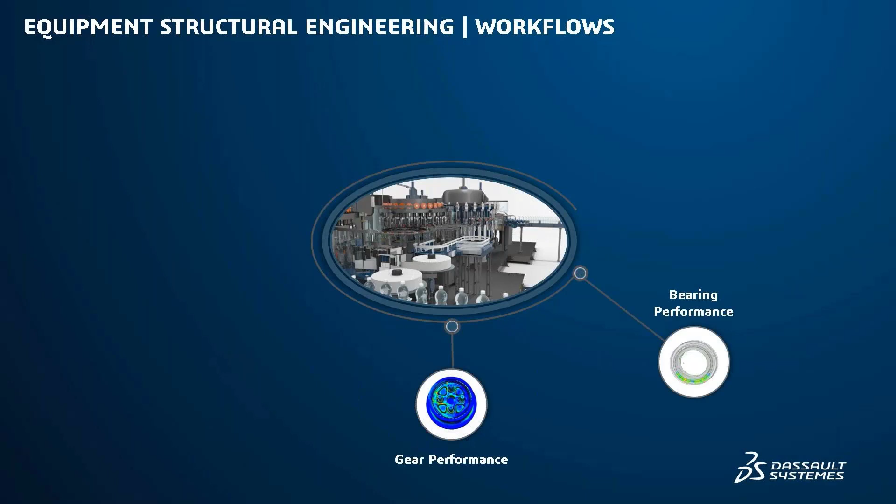Manufacturing products and the massive urbanization of the planet - industrial equipment is at the core of our global transformation. To meet this demand, both products and manufacturing processes need robustness to minimize downtime and associated costs. Increased reliability leads to reduction in maintenance costs and significant savings for industrial equipment companies. Leveraging the equipment structural engineering industry process, industrial engineers design extended life while successfully meeting performance, operational, and manufacturing requirements. The equipment structural engineering industry process experience provides a set of solutions specifically conceived to maximize the life and performance of manufactured industrial equipment. Our solutions are powered by the 3DEXPERIENCE platform, a collaborative space where innovation is fostered through integrated processes from requirements to modeling to simulation.

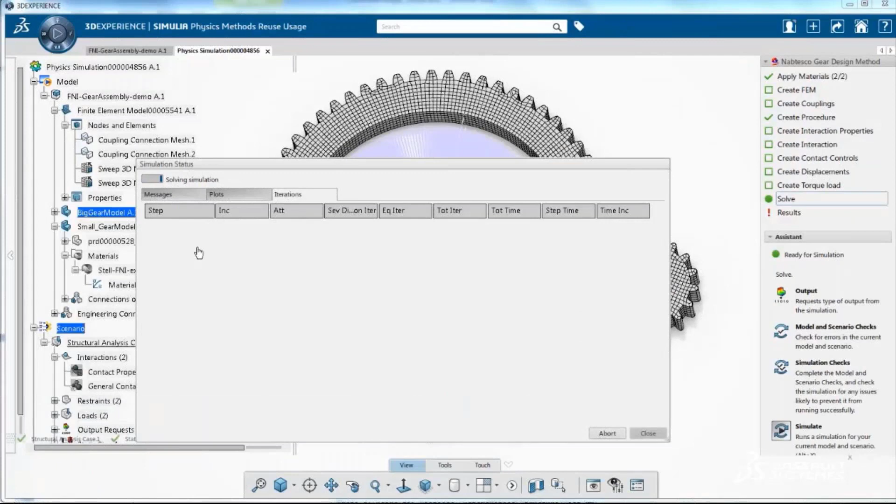Gears are fundamental components for all industries. Failure will often result in catastrophic failure of the entire system. Our efficient and accurate simulation-driven design process on the 3DEXPERIENCE platform helps ensure proper performance and predicts durability to minimize risk of failure and associated maintenance and downtime costs. Not only are individual components critical, but how they interface with each other plays a key role in their ability to perform throughout their lifespan. Our solutions allow you to efficiently assemble digital components and quickly determine the best design to meet durability and performance requirements.

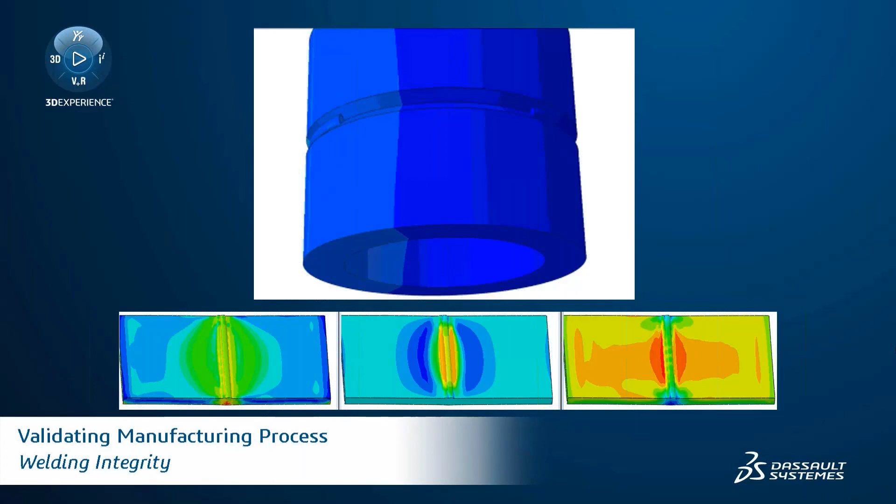Processes themselves can introduce reliability issues. Welds are critical for the assembly of components and thus potential points of failure. With our structural simulation solutions, you can ensure that welding processes do not introduce undesired residual stresses that can cause failure in operation. Finally, complex manufacturing processes such as induction hardening can introduce defects in a manufactured product, such as distortions or cracks. These defects can be predicted and eliminated with a digital induction hardening process using our best-in-class technologies, ensuring reliability of products. With the equipment structural engineering industry process, you can ensure that your manufactured products will perform in demanding environments and stand the test of time.

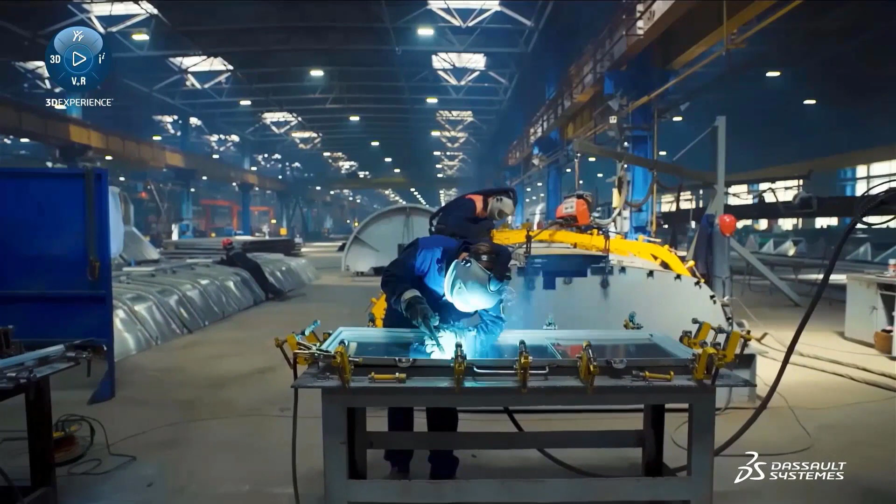All right, so I hope this gives a brief idea about what this is going to be about.

This technology is called 3DEXPERIENCE Works, and the solutions it brings together is what we're going to see as the 3DEXPERIENCE platform simulation. The 3DEXPERIENCE platform is nothing but a platform where all the brands from Dassault Systemes come together and share a collaborative dream to give better solutions to customers. You can have different areas that you work on, all targeted within the same platform using the different brands from Dassault Systemes altogether. There are different brands: SOLIDWORKS, CATIA, SIMULIA, and others. We are going to work in collaboration with the Dassault Systemes SOLIDWORKS and SIMULIA brands altogether on the 3DEXPERIENCE platform journey that we are about to see.

The 3DEXPERIENCE platform simulation is nothing but your integrated simulation for your design. It is design-centric and very comprehensive, with advanced simulation capabilities. It is a multi-physics simulation - we can couple different physics domains together - and it is an on-cloud, scalable solution as per your industrial need. And of course, all the stakeholders can collaborate between themselves with the help of this 3D experience platform simulation solutions. So that's what 3D experience works carries to you in terms of this.

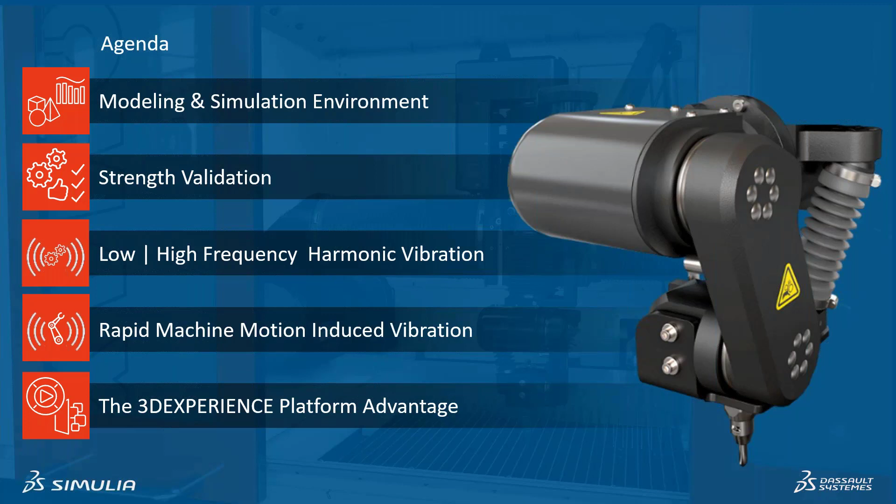Of course, this will all be told together on the way, the advantages of the platform here. So let's focus on the first task: modeling and simulation environment.

In here, of course, we are designing in SolidWorks, and our data will be designed in SolidWorks. In order to make use of this cloud solution of the 3D experience platform, we have to save our data on the cloud. So of course, we create a CAD, and with just a right click, we save the data on the cloud. That's how easy it is.

So there's no import and export of CAD data. We're just saving a backup copy on the cloud, just like we do with Google Photos. We get these photos, we have one copy here on the desktop, or on the mobile phones, and we get another copy on the cloud, Google Cloud, just like that.

So next, let's see how we can have a quick and easy connection between SolidWorks and Simulia through the SolidWorks connector. There's something called a connector in between, and we can connect SolidWorks to the 3D experience platform. Through this connector, we are going to push our data to the 3D experience platform. That's how easy it is.

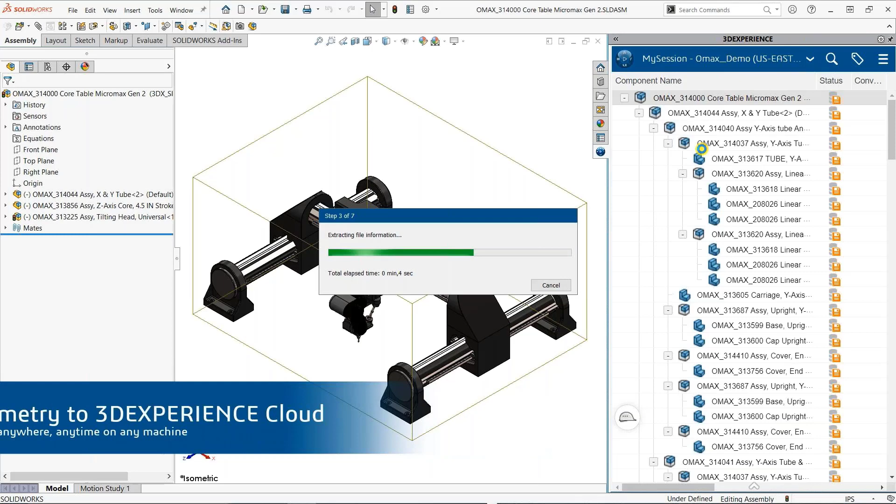Once we save it, it's going to be saved in the PLM environment, which is powered by the ENOVIA solutions from Dassault Systemes, and everything will be saved on the cloud. A copy will be used afterwards for simulation purposes there.

That's how we can easily pull the data here. We can see the conversion status on the right hand side, and once the assembly got converted, we are free to use this for launching the Simulia app.

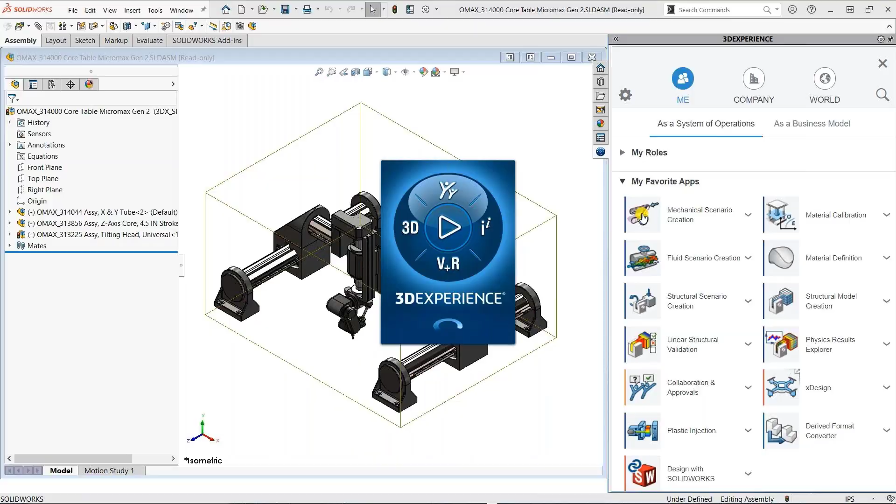Of course, for launching the Simulia app, you don't have to go very far. You can directly launch it from the same 3D experience add-in here. And on the way, we can set up the simulation studies, set up the analysis title, types, etc., directly from this environment here.

So that's how your data is connected to SolidWorks and the 3D experience platform side. I can go ahead and rename this simulation title and choose which type of analysis you want to select. And with the help of OK, we can quickly go to the further studies to set up here.

So in here, you can see we are actually not moving further away from the design. Everything is connected. Once you make a change inside the SolidWorks design, this is obviously connected to the 3D experience platform. This change will be reflected there with the help of this update button. The change will automatically be updated on the 3D experience platform directly from SolidWorks through the connector. So your data will always be in sync, and every change that you make will be reflected there. And if you want to store the revision, yes, revisions can also be stored there.

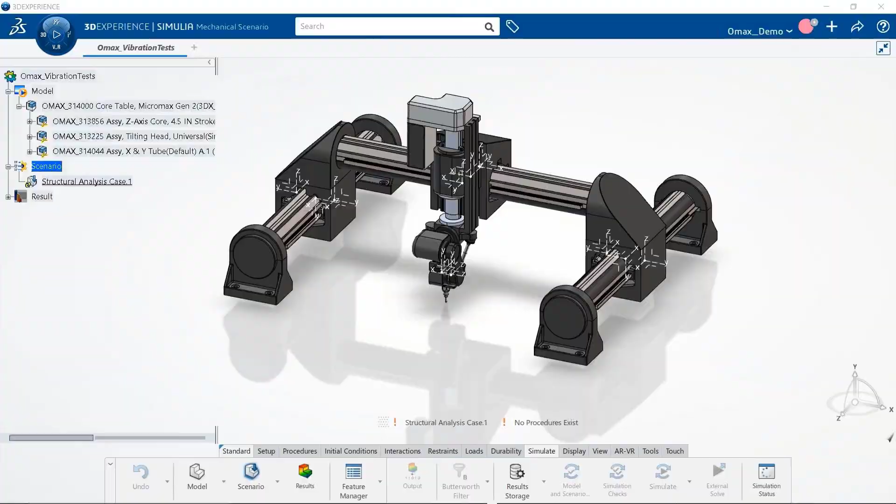So next, we can see how we can define the FEM, how we can define the materials, whether my materials will be carried here or not, and how we can go ahead and define, let's say, the finite element model in order to make the analysis here.

Let's see how we can do automated finite element representation, like we are used to doing in SolidWorks simulation. Of course, this technology can be elaborated in the 3DEXPERIENCE platform simulation as well. But the thing is, here we have very advanced meshing capability as well in the 3DEXPERIENCE platform.

We can manage the part mesh in large assemblies, configure the mesh using mesh procedures. That is to say, I can give a rule, and rule-based meshing can be done for all the parts all at once. So that's how powerful it is to do it.

So let's have a look how we can do this, one by one. Once I have brought in my design here, I can switch to something called the model assembly design app, where I'm going to set up something called the FEM model.

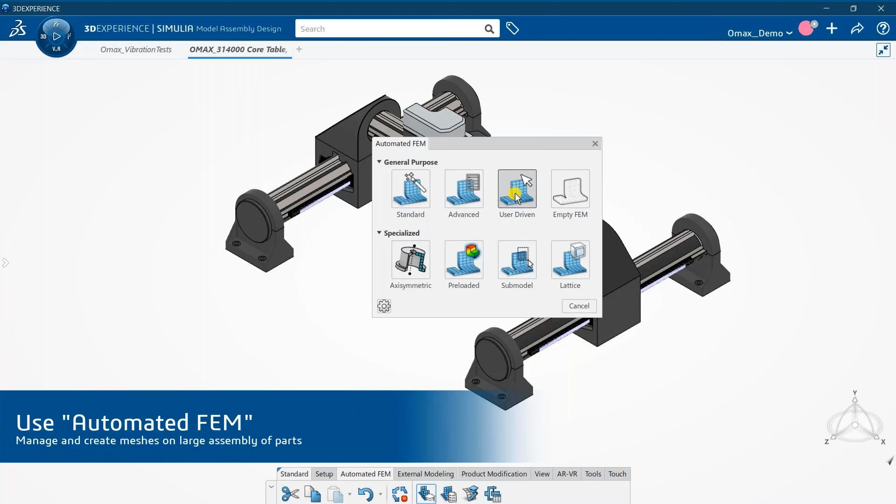The FEM model is nothing but your finite element representation for your entire CAD model. And based on the finite element method, we are going to solve this for various problems like structural analysis, vibration analysis, and so on.

I can make use of different ideas here. For example, if I want to apply meshing, I can go ahead and do the conventional tetrahedral mesh that we're used to, and I can make changes to any mesh here.

On the right hand side, I can ignore some parts that I do not want to mesh, and I can go ahead and assign different kinds of mesh to different kinds of parts.

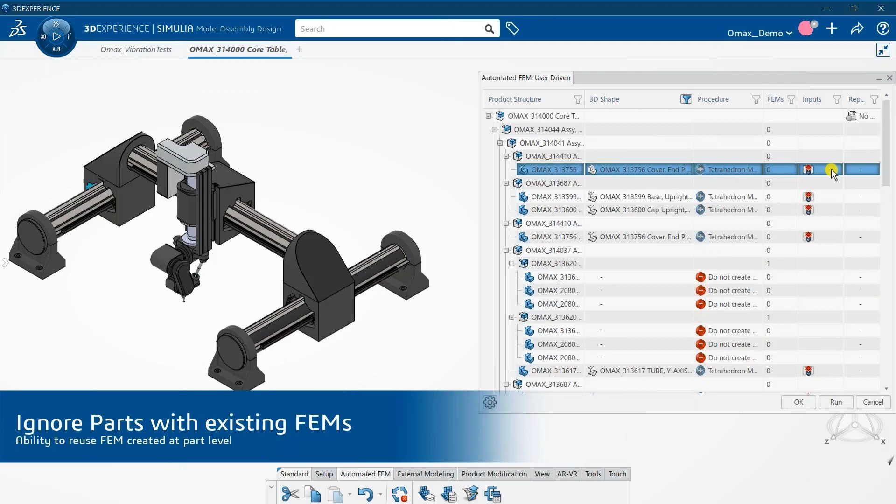This technology is powered by Abaqus in the background, so the meshing technologies from Abaqus are carried over here, and these can be leveraged in terms of meshing as well as solver capabilities.

Once I'm done with the meshing, I can apply the mesh for the remaining parts. Here you can see remaining parts — I've just done it for one sub-assembly. I can go ahead and do it for the other sub-assemblies.

If you want to do some other meshing, like rule-based mesh, you can apply the procedures for the mesh. Currently I'm just ignoring the parts which are not going to be meshed and will be ignored in the analysis — those things I'm taking care of here.

Once everything is set here, I can hit OK, and in the background the meshing will be happening on the simulation.

Yes, we can define the materials. The materials can be defined in an easy fashion — just like we go and apply material in SOLIDWORKS, those materials will be carried over here.

Or with the help of the material definition app, we can select and apply materials to the parts, just as we used to do before.

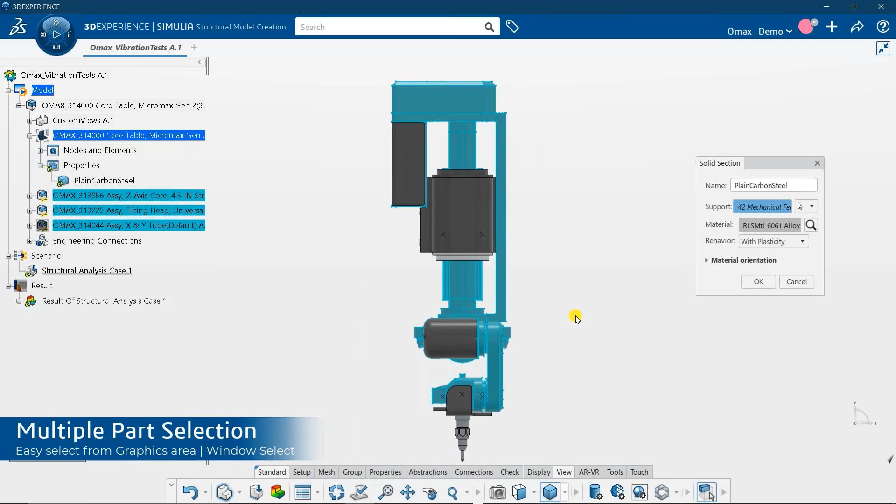We can select all the assembly at once, or we can ignore some of the parts here if you don't want to include them.

With the help of these material palettes and search filters, I can choose from the extensive database which material you want to apply.

For example, if I want to apply plain carbon steel, I can choose which simulation properties are taken care of, whether you want to solve it with plasticity or without a plasticity model — these things can be handled in the background with the model definition app.

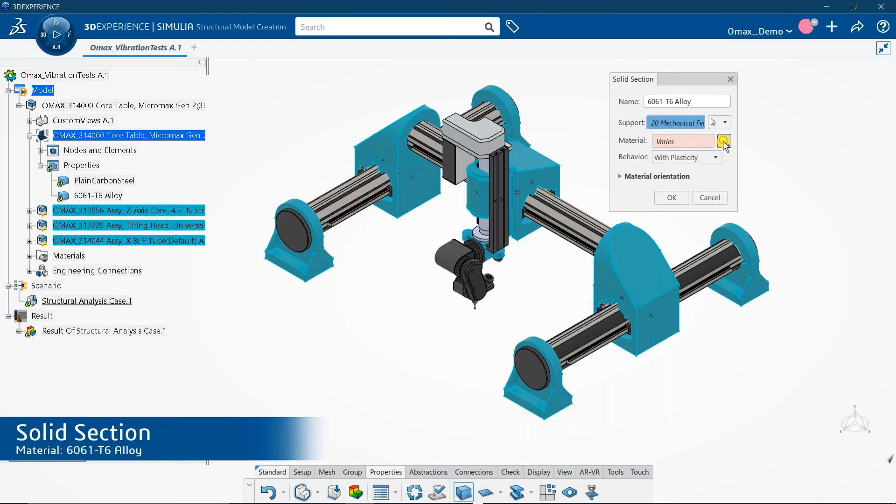This procedure is repeated for the different parts, with section definitions repeated for the remaining parts you want to include in the analysis. Every part should have a section and material definition assigned to it in order to solve this in the finite element model.

It's not only limited to metals — plastic materials can also be taken care of here. As you can see, copolymer materials will be assigned to these parts, I think these are the caps. In the same way, we can assign the rest of the parts and materials.

With this material definition done, let's move on to the next step in the analysis. Every step is guided by the assistant panel, which will walk you through all the procedures you want to follow. Let's say I want to define assembly interactions such as ties, couplings, and connectors, to define how the components are coming together. This is where we can make use of this panel to set assembly interactions.

You can set assembly interaction into it. The tie will bond all the parts together so they behave as a welded part or single part. Coupling will track the key results at the tooltip, and since this is a water jet machine, I want to see how much the self weight will affect the accuracy here, so I want to track the results at the tooltip - it works like a tracker for my results data. Connectors will control the relative motion between the parts, so that's how connectors or couplings take care of this.

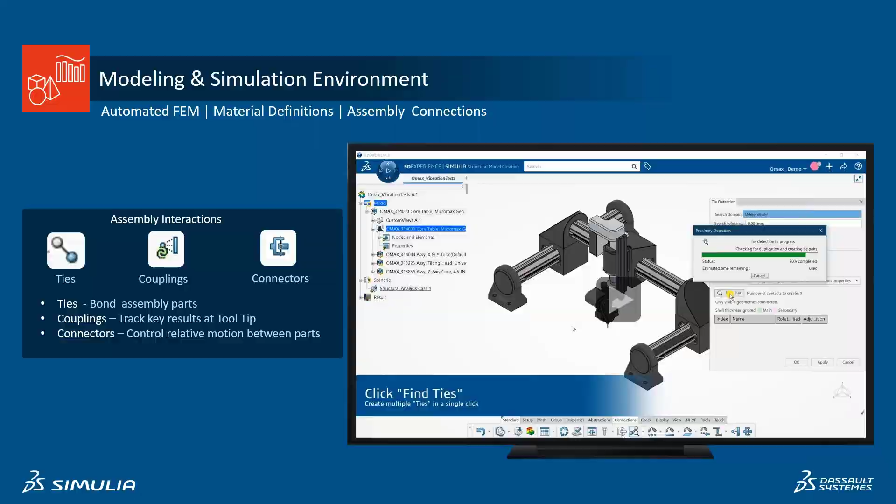In order to assign that, I want to go to the connections, and here we have something called tie connection. With the help of automatic tie detection, we can select the whole model, and it will automatically detect which components are touching and which will come into the connections. It will pinpoint which components are touching and suggest which can be assigned with tie connections, and we can decide where we want to assign the tie connection.

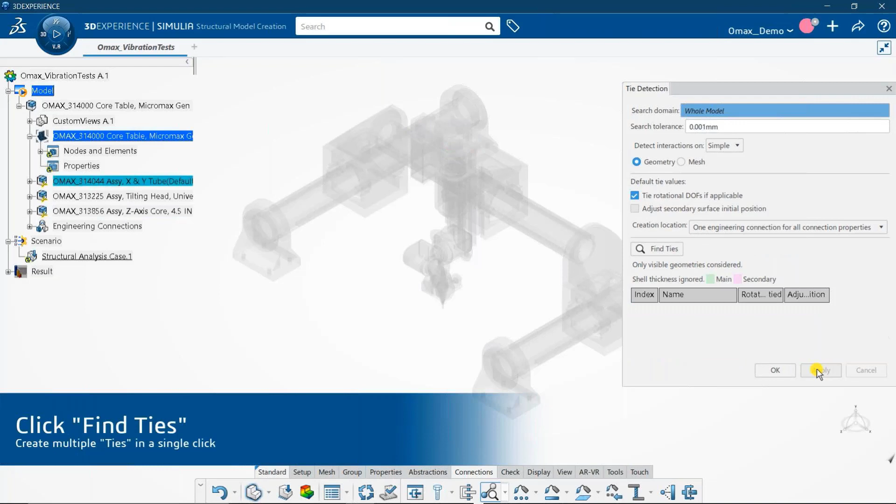So we can select the portions you can see. Once we hit OK, everything will be tied together just like a bonded contact in SOLIDWORKS. Once we assign this, we can go here and represent the engineering connections and rename this with the tie connections we want to see.

Likewise, let's say if you want to create a link connector, link connectors can be selected here. Links between two supports or parts can be created, and along with that we can assign the translation and rotation definitions for this link connection. Here you can see this is sort of a ball joint - this is a link between two ball joints, and this is how this small degree of freedom is taken care of.

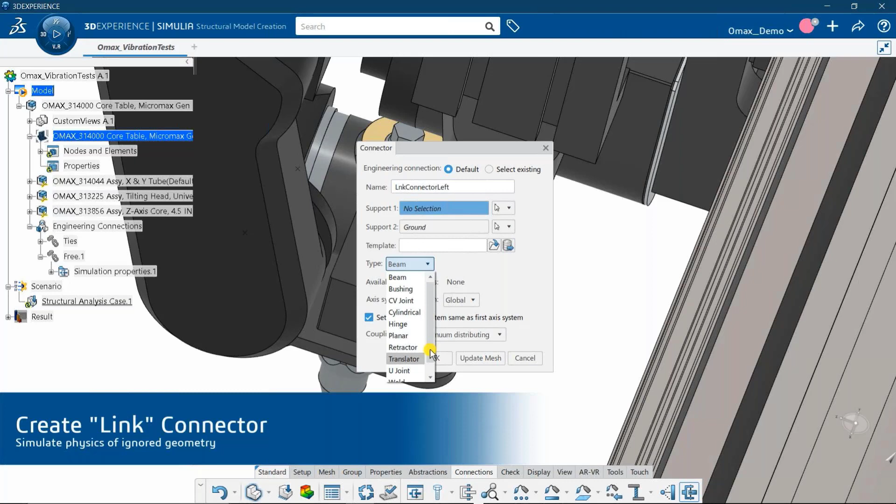Once we select that with the help of this link connector, you do not have to take this part into account, since we have ignored this in the meshing. We just want to save on mesh calculations - we do not want to include that part, but we want to take the effect of that part into account. So that's where the connection is being taken care of.

Between parts, this is taken care of with the help of rigid body elements, and with this coupling we are depicting the effect of that rod into the simulation without taking the CAD model. Finally, with the help of coupling connections, we can track the tooltip and assign and track the results data all across that tooltip.

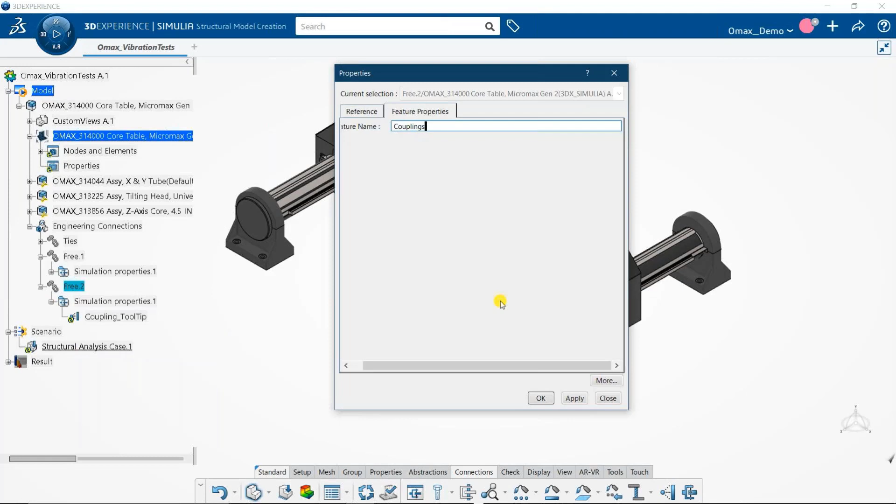You can see that towards the left hand side, everything we do has been recorded onto the feature manager tree, along with the definition, the CAD, and the simulation - all of the stuff gets recorded on the left hand side. At any point in time, if you want to change things, you just have to go to the left hand side and edit those things as you feel.

So defining and editing is a single way task here. That's how we can have seamless CAD and CAE associativity, and with the help of very quick and few steps, we can define the simulation setup along the way.

So now we have defined the modeling and simulation environment. Now let's have a look at how we can do the strength validation here. For the strength validation, we just have to go for physics scenarios, and we have to create one scenario here. Of course, we can set up a scenario likewise. So let's consider a scenario first here.

My scenario here is I have to analyze the structural weight, and of course I want to see the tooltip reaction from the water jet, how this thing is affecting my structure here. Since this is a water jet machine, from the nozzle tip to the workpiece there will be a water connection, and if I assume the water is an incompressible fluid with no way to escape, there will be a reaction to it, giving a reverse back reaction to the tooltip, and every structure gets affected from that reaction.

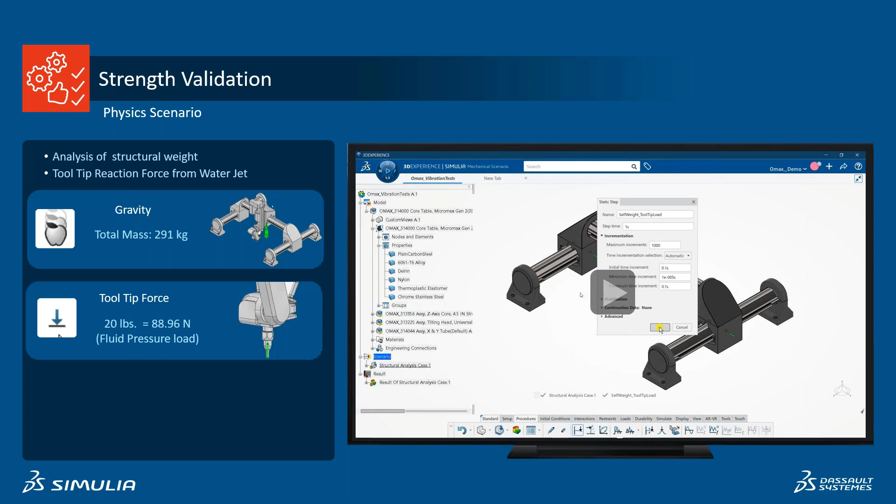So I just want to analyze this scenario from here. The loads I considered are nothing but gravity, the tooltip force which is the backward force, how this tooltip applies a fluid pressure load onto this, and finally the clamp. So this thing will be fixed at the clamp location whenever we are machining here.

Of course, this head will be moving during the machining, but let's say I consider a static scenario right now, just to test this assembly from the static standpoint. In that case I just want to assume these things are locked together and everything is bonded together, and then the force will be coming. We can see it as the starting moment of this water jet machine.

In order to do the scenarios, I can go to the mechanical scenario creation app. I can go here and create the static step. The static step is a non-linear step, and I can define a time increment, and that's how the simulation becomes very accurate, since we are using non-linear analysis from the start.

So here I can go and select which areas that I want to clamp together. Clamp is nothing but the coupling - those four bolted portions there. I can assign the gravity to all the models, and this arrow will indicate that the gravity load is assigned, and finally we're going to assign the tooltip force at the tooltip here.

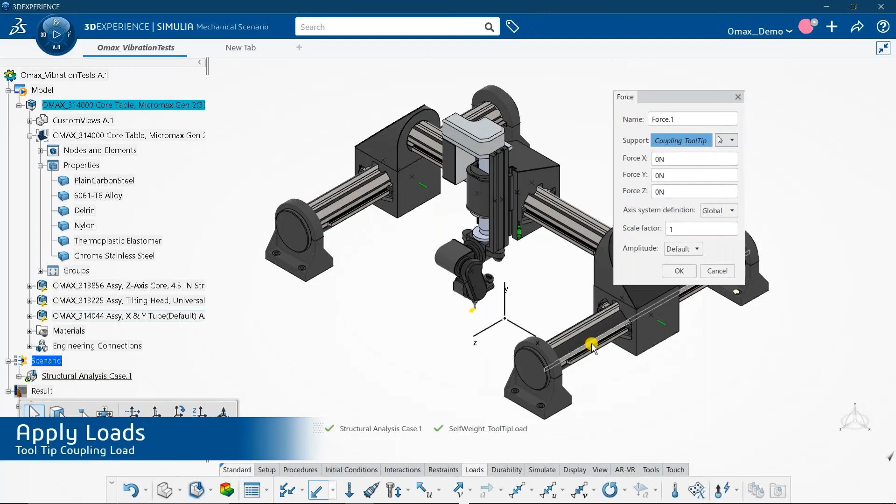So in here I can go and select the connections. Since we have assigned the coupling there, I can directly assign load to the coupling, and the coupling will transfer that load to the tooltip here. That's how this thing goes on.

Instead of selecting the part, all the geometrical nodes will be concentrated to the coupling, and then from this coupling this load will be transferred to all those geometrical nodes, and then the rest of the geometry follows. Of course I can apply the translation here in order to get this effect into account.

Let's say servo motor lock here. So in here I am assigning zero translation, that is there's no relative motion between the parts along the way, and that's how we are going to test it for the self weight and the gravity tooltip force.

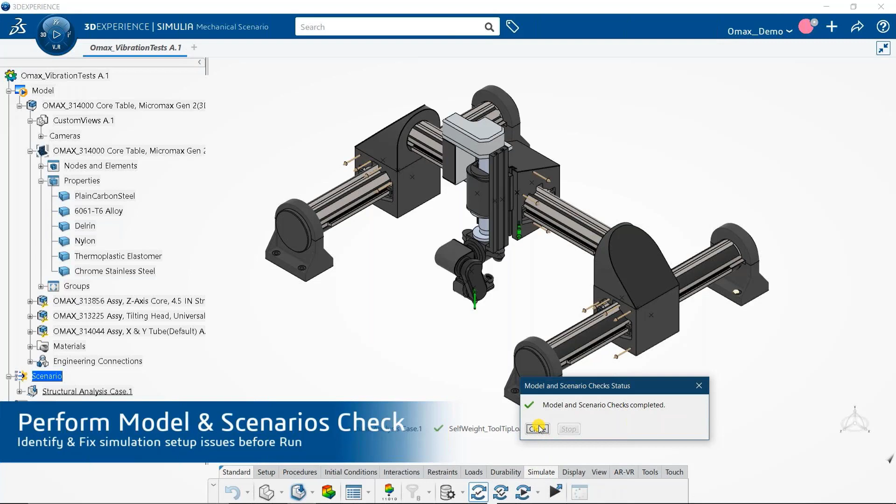Of course I can perform quick model and scenario checks. This is a very important step, because whatever I set up, I want to make sure that I set it up correctly or not. That's how the model and scenario check will help you out - it will tell you whether there's any problem with your setup, or if you need extra information. If you need extra information in the diagnostic viewer, we can go ahead and view what information needs to be fed to the solver. This is how the simulations are made error free from the setup standpoint.

All right, so everything is set up now. I just want to run the simulation. There are a few advanced options available here. In here you have something called running simulation on the cloud, and this is very fast, let me tell you. We can make use of the high performance computing resources along the way.

Of course, it will reduce your software and hardware cost along the way, and it will maintain your data consistency, streamline the processes, and improve the collaborations. Improve the collaboration, that is to say, if your colleague or your managers want to see what's going on during the design or in between the simulation, you can just share that simulation link there, and they can also view it on the cloud along the way.

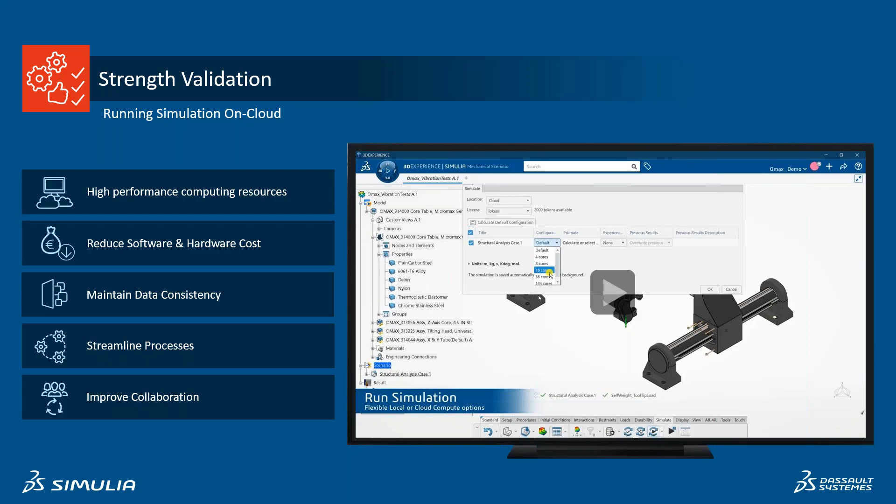So that's how everything will be taken care along the way. Once everything is set up, I can go here, hit the run simulation button, and of course we have options for cloud computing and local computing as well.

I can select how many cores I want to utilize. These local interactive options are your local computing options, which will utilize the local cores. Let's say if you're using a 6-core machine, it will utilize 6 cores, up to maybe 8 cores it can utilize locally.

But on the cloud, you can go up to 144 cores. Superb, isn't it? With the help of that, we can select how many cores we want to utilize, and that's how the solving time will be reduced. The number crunching will happen on the cloud, and you're free to do other work in the meanwhile.

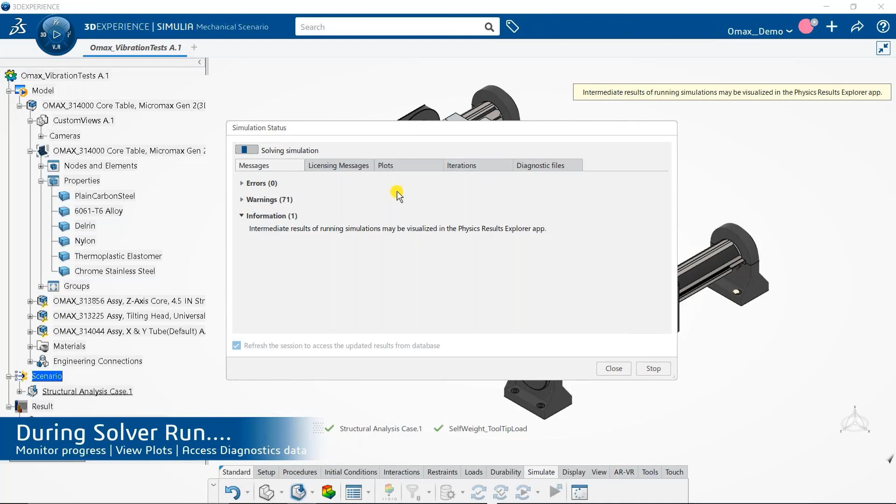So that's how productivity can also be increased during the simulation setup. And of course, we can monitor the progress. We can view the plot, access the diagnostic data, see what's going on in the solver background, what iterations are running, whether the plots are converging, and how the convergence criteria has been kept. All of this can be tracked with the simulation status window.

So likewise, you can see the iterations here. They will continue to do their job, doing the number crunching, and finally at the end, the simulation will extract the results and save the simulation on the cloud. Everything is done very smoothly and fast with the help of these cloud computing options.

And finally, we can hit the results button, and the results will be shown here. So let's have a look at what we can do in the physics results review.

My objective was to analyze the structural effect of structural self weight and the tooltip reaction from the water jet. We are going to evaluate this from the standpoint of von Mises criteria, because there are more ductile materials involved in this one.

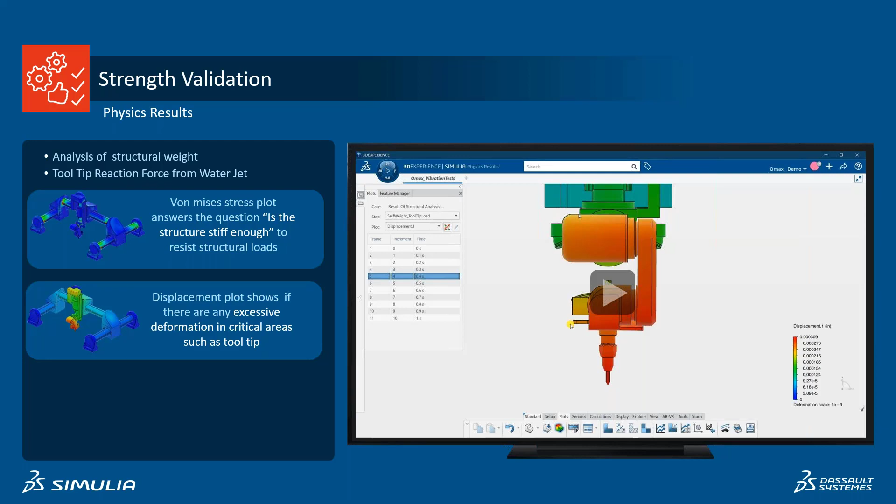Is the structure stiff enough to resist these structural loads? That's my primary objective. I just want to see how much displacement it will cause, because this displacement will ultimately affect my accuracy of cutting in place. That's how we can see it with the help of the displacement plot.

And of course, I can check the coupling responses, which shows the concentrated loads and displacement at the tooltips. Since this tooltip is a very essential part in the cutting process, I want to track the niche and detailed results around this one.

So this is how we can do this, by tracking the displacement at the tooltip.

Once we hit the results button, we can see these results in the fashion of animation, in the fashion of structural plots. We can track down the von Mises stresses, and track down the results that have been raised here, and you can see the displacement results along the way. It's very intuitive to do, just like we do in our regular SOLIDWORKS environment.

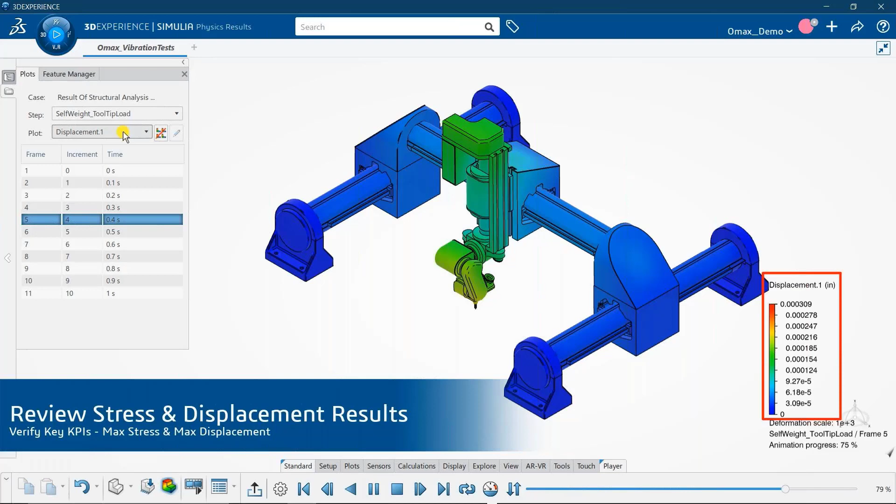The increments will be tracked for every step of the analysis, and the last step will give you the final results. With the help of animation, we can see how the response of the structure is going to be for that applied load condition.

Once we apply the load there, in the same fashion we can do it in the physical environment here. The probe displacement results will guide you about how we can probe the displacement along this tooltip. So here I'm selecting multiple points along this tooltip, and when I go to the XY plot, I can select which variable I want to track.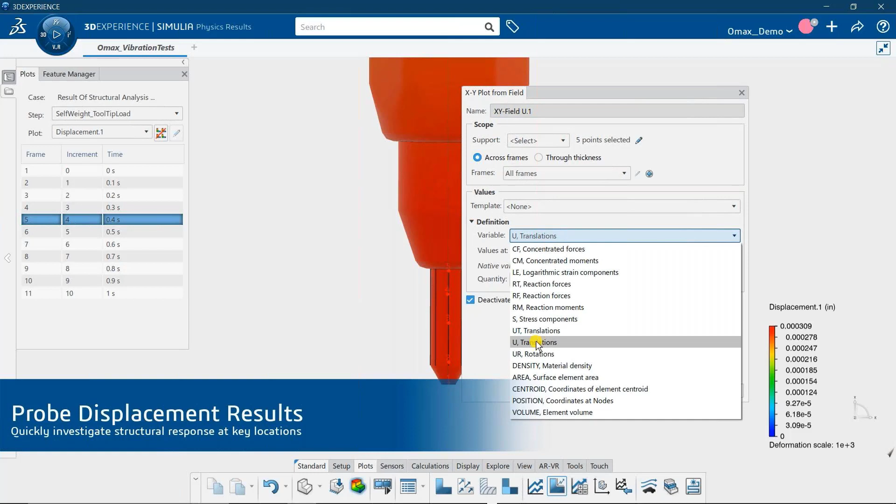Here I just want to track the translation, and I'm interested in magnitude only. Once I hit OK, it will tag the tooltip reaction or tooltip displacement results along the way. I can pin it down to the left hand side, and note how this tooltip is going to behave under this loading condition once the jet starts.

That's how we can track down and interact with the XY plot here. The detailed investigation of the results frame by frame can be done with the help of this XY plot, just as we do.

So, finally, let's move on.

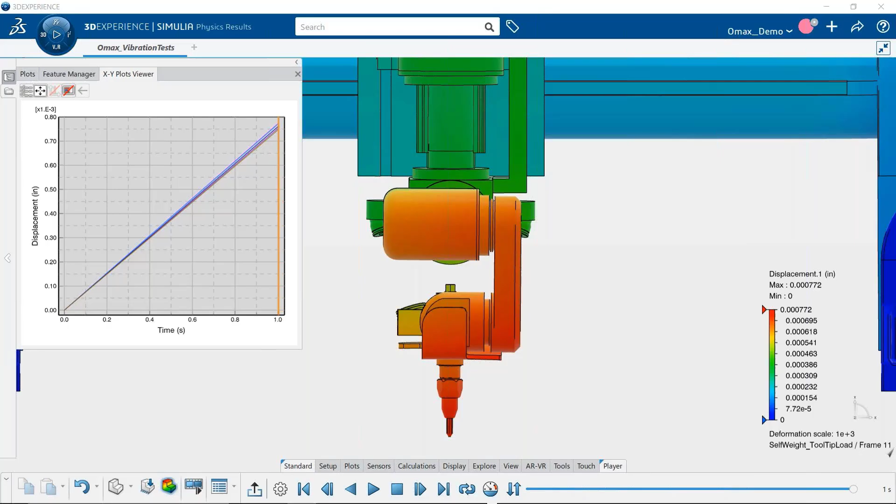This concludes the structural strength validation, which ensures the structure has stiff responses to the static load conditions. But of course, this is a machine, and there will not be ideal static conditions every time. There will be motion, and due to this motion, there will be some vibrations, and this vibration will also affect the frequency and the accuracy of the machine. So that's what we want to take care of.

So here we have a powerful low and high frequency harmonic vibration study that will tell you how we can track down the effect of vibration on the machine, how the accuracy is getting affected when we subject this machine to vibration. And of course, if we take appropriate measures using this data, we can reduce the effect of the vibration coming onto the machine. So that's how we can do it here.

So let's see how this thing will be processed. In order to do this, I'm just going to extract out the resonant frequencies first.

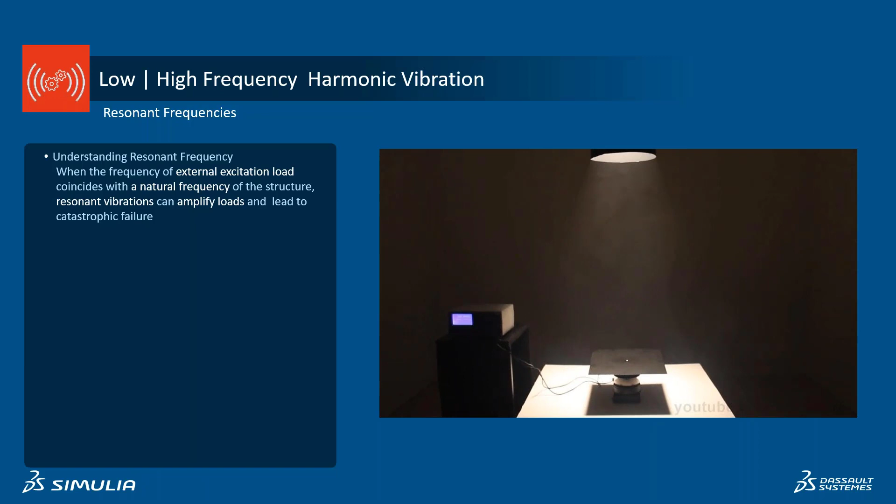To understand this resonant frequency: when the frequency of the excitation load coincides with the natural frequency of the structure, the structure resonates and amplifies the loads and the displacement, which leads to catastrophic failure.

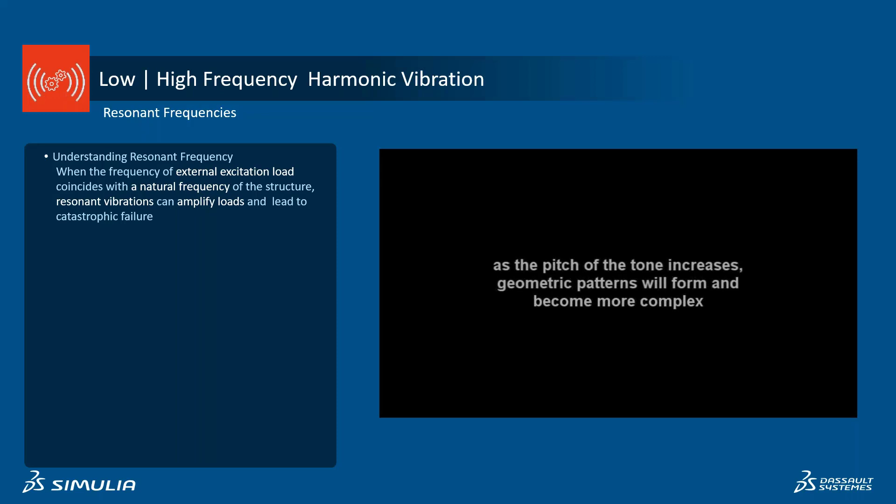You can see towards the right hand side, there's a video playing. It will show you, let's say this is a plate, where you can see there are tiny particles spread out, and you can see what happens at different frequencies, how these particles are reorienting themselves with the help of the vibrating frequencies.

So this is not magic, and it's not magnetically placed there. With the help of the frequency it's subjected to, you can see I'm changing the frequency values here towards the left bottom side. With the help of different frequency values, it is showing different shapes. Please remember, it is showing different shapes, and that's what we call mode shapes in frequency analysis.

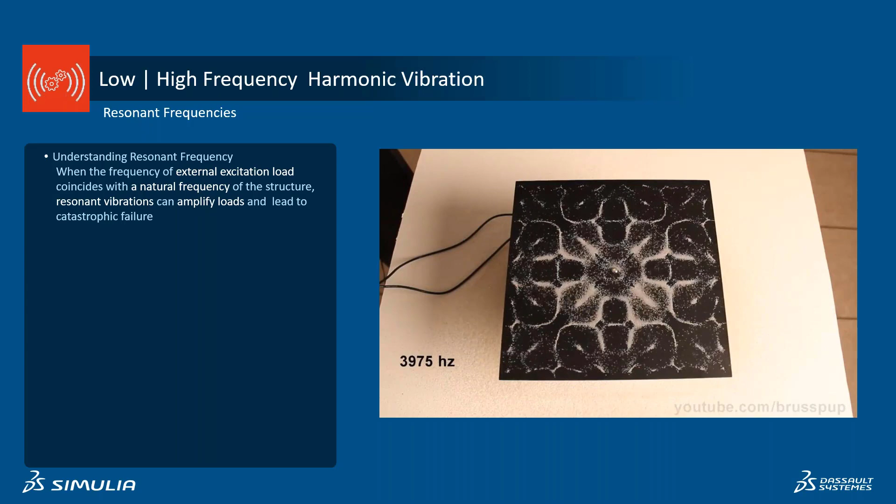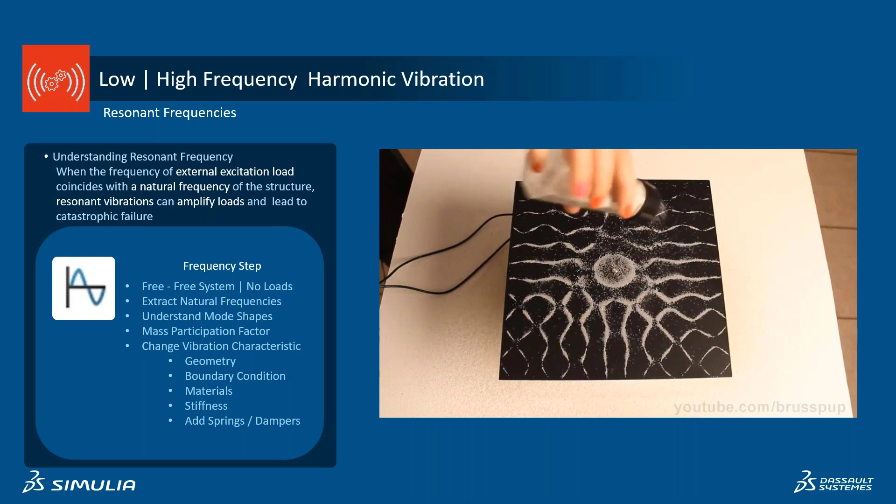So likewise, we can do further things here. We are going to define the frequency step. We are going to extract the frequency for the free system with no loads, extract its natural frequencies, understand the mode shapes and the mass participation factor, change the geometrical conditions like geometry, boundary conditions, material stiffness. We are adding dampers, and we're going to change the vibration characteristics along the way.

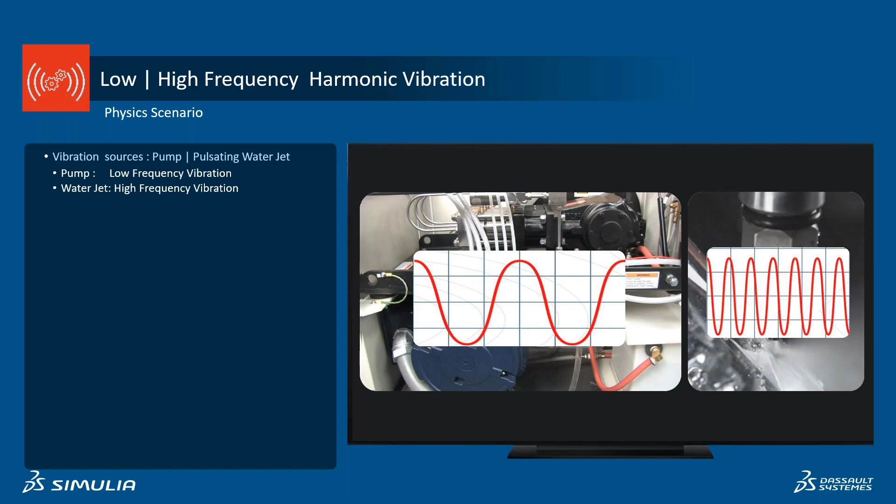All right, so let's correlate this application with our machine. In our machine, my main source of vibration is the pump and pulsating water jet. For the low frequency vibration, a pump is a low frequency vibration source. A water jet is a high frequency vibration source. You can see it rotating at 500 rpm to 1500 rpm. If I convert that to hertz, it's like 8.33 to 25 hertz around.

In order to create that, what we can do is create a new analysis case in the same analysis case we studied earlier. So you do not have to define a new study, it will all be tracked down here. You just have to define a new step. All the associated finite elements that we created earlier will be tracked in this study as well, so you do not have to go and change the finite element every time.

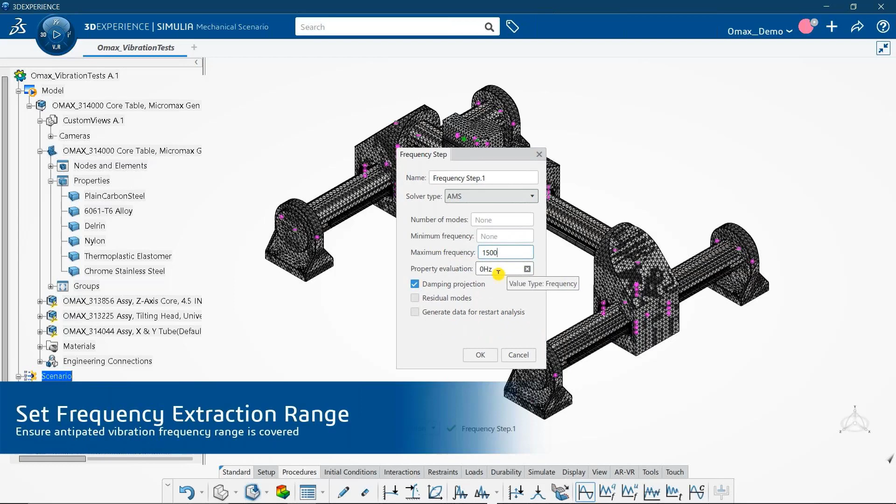So we can go ahead and define a frequency step. We can define which frequencies up to which we want to study. Initially, we are going to study for 1500 hertz. We are going to define two studies here, by the way. Here I just want to change some restraints for this one, and I'm going to select the clamp forces once again.

I'm going to assign the fixed displacement constraints for some translation here, for the servo motor lock. Just in the Z direction, it is going to be frozen - it's not going to move there. And the other servo motor is going to be locked in the X direction.

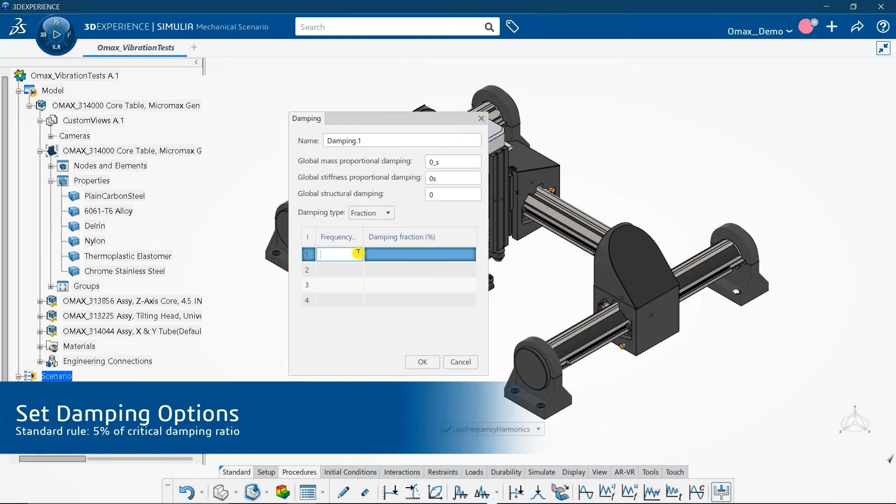So here I'm just going to create a harmonic step, and this is going to give us the central frequencies that we want to extract - from a lower frequency of 1 Hertz to an upper frequency of 500 Hertz, I can extract the natural frequencies. We can also define the frequency and damping factor, entering the damping ratio or damping percentage. Currently, I'm entering 5% damping.

Finally, here we're going to provide an external base excitation, in the amplitude form. There's no sudden excitation here - smoothly, this is going to be exciting, or you can say the force is going to apply. That's how uniform base excitations will be provided to the assembly here.

So displacement-based motion, we can select to apply the loads from the pump. And we can review this multi-step analysis - here we are going to first do the frequency step, then we are providing the vibration analysis step. This is a multi-step analysis.

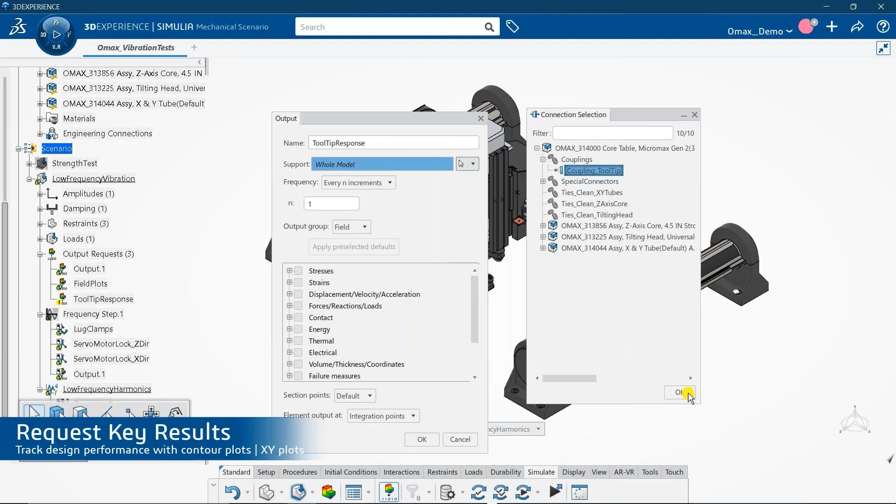We want to extract the key results with the help of output request - we can select which results you want to extract. Here we are interested in the stress and displacement primarily at the tooltip as well as globally. I'm selecting the tooltip, selecting the coupling for the tooltip, because the coupling is combining all the nodes together from that face. For the tooltip, I'm extracting in a very detailed fashion, because this is a very important part of this analysis. So likewise, the setup will be created.

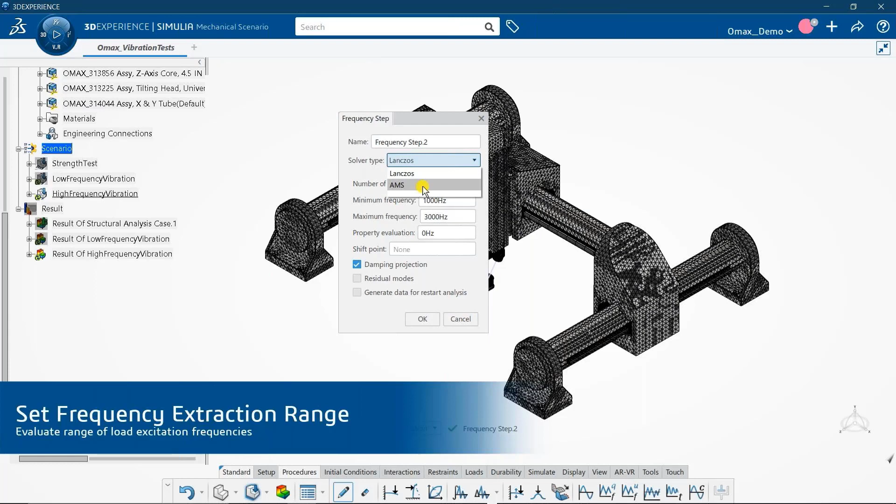So let's set up another study for the high frequency. Since we have set up this study for the low frequency, now let's set up the same study for the high frequency. In a similar fashion, the associated finite element will be linked to the same one. We are going to create the frequency study once more, setting the higher frequency range, and in a similar fashion set up this entire study altogether for the high frequency applications.

Once we set everything up, we are going to run the model and scenario check once again, to see whether my setup is correct or not, and then we're going to run it. Once the setup is run, let's see how we can view the physics results.

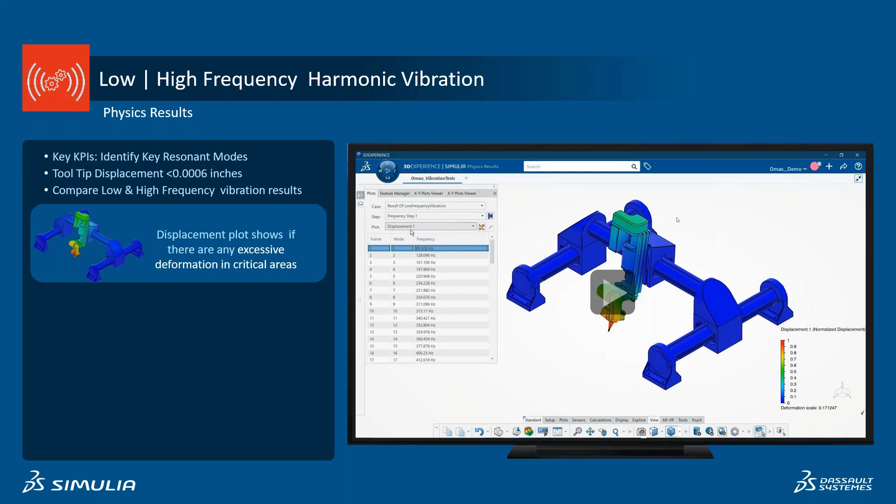Our key KPIs here are how to identify the key resonant modes, displacement at the tooltip. My criteria is it should be less than 0.0006 inches. We're going to compare the results of the low and high frequency vibrations. So the displacement plot shows whether there is any excessive displacement or deformation in the critical areas. The coupling responses show the displacement and acceleration on the tooltip. By side-by-side comparison of the results from the low and high frequency side, we can use this compare result tool and extract meaningful outputs.

So here you can see the low frequency results will tell you the mode shapes - the structure is going to reorient itself as per these mode shapes. When this mode shape and the frequency combine with your external excitations, that's where resonance occurs. We are going to check the resonating conditions here also with the help of that.

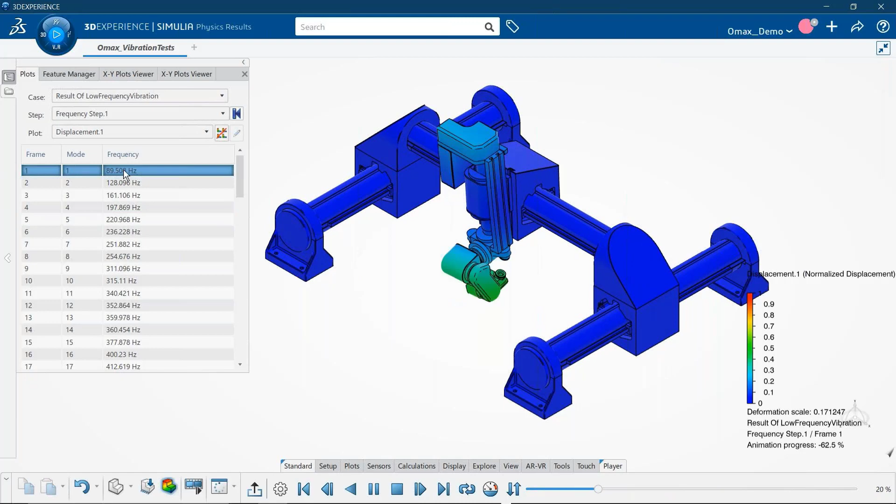So let's say if I go for the low frequency applications, you can see the displacement values at different tooltips for different frequencies. Let's see the results at the tooltip for the low and high frequency applications because of this pump vibration response - we can compare the different results here altogether. There are 3 data points that we want to track, to see how these are affected during these vibration frequencies. Here you can see the peaks where resonance conditions have occurred, but those displacements in inches are quite high compared to that one.

So of course we can track out the pump responses, the displacement and tooltip responses for the pump vibration source. Here we are tracking it for frequencies lower than 500 hertz, from 0 to 500 hertz.

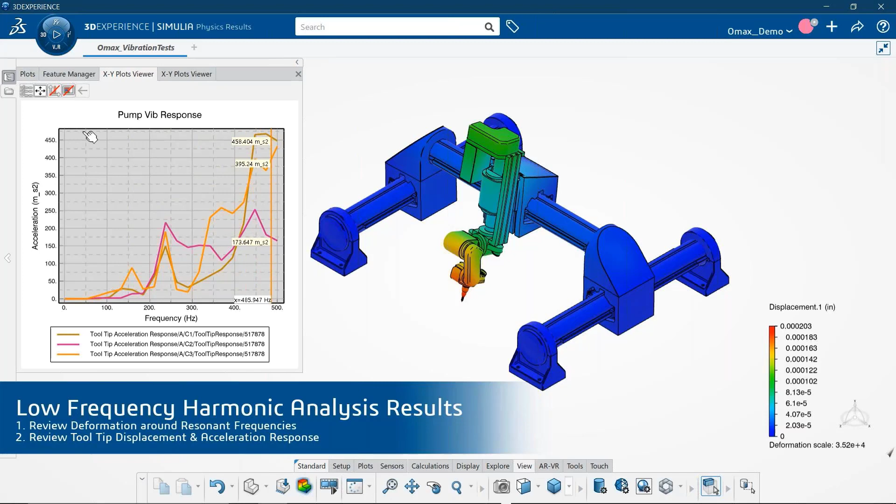So here you can see how these accelerations and displacements are being tracked down with the help of this frequency step. So now for the high frequency results, of course we can view the different mode shapes for the different frequency values, and similar plots can be tracked down for the high frequency harmonics.

So here, of course, we can view the deformation around the resonating frequencies, review the tooltip displacement and acceleration responses with the help of this low frequency analysis report.

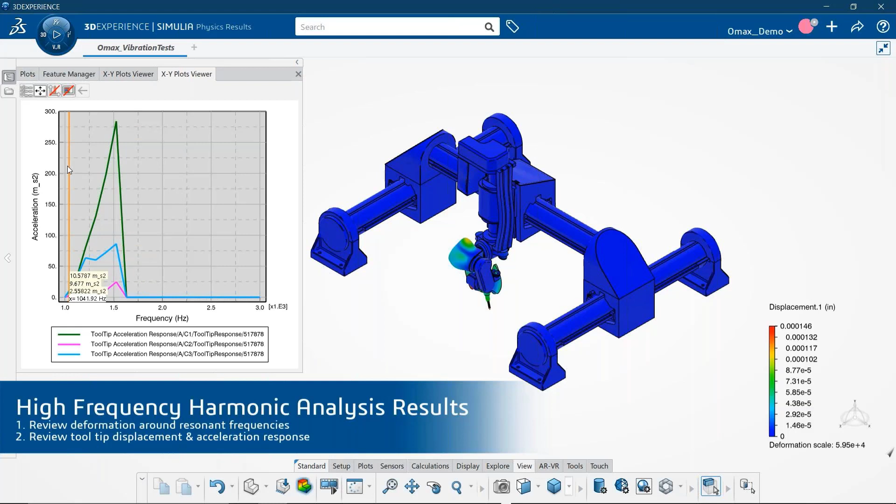And finally, when everything is done, we are going to compare the results from the lower frequency and the higher frequency altogether. That gives us an idea about how the structure is responding to the lower and higher frequencies. So here, right now I'm comparing the displacement at this highest resonating frequency peak, which is around 1000 hertz. So that's where the problem is going to occur, and we are going to express out the maximum displacement.

And finally, with the help of compare results, we can go to display and compare results. We can select which results we want to compare, and it will combine the results from the different studies, and everything will be shown in the same window. So that's where we can see for the lower frequencies and the higher frequency how the results compare, and whether it is an area of my concern or not.

And my criteria was it should not be greater than 0.006, but here you can see it is still lower than that value. So that means my machine is pretty much safe, and whatever design I have done is pretty good from that standpoint.

So that's how we can evaluate and ensure the minimal vibrations at the tooltip with the help of this low and high frequency vibration analysis. So this is for the basic vibration analysis.

Let's say if I want to consider, because this cutting action is going to be there, and this cutting action is performed based on the servo motors, and it is going to drive that tooltip in the profile cutting. And I just want to evaluate what happens if there's any rapid machine motion induced vibration. I want to make sure that my accuracy will be very high in that case.

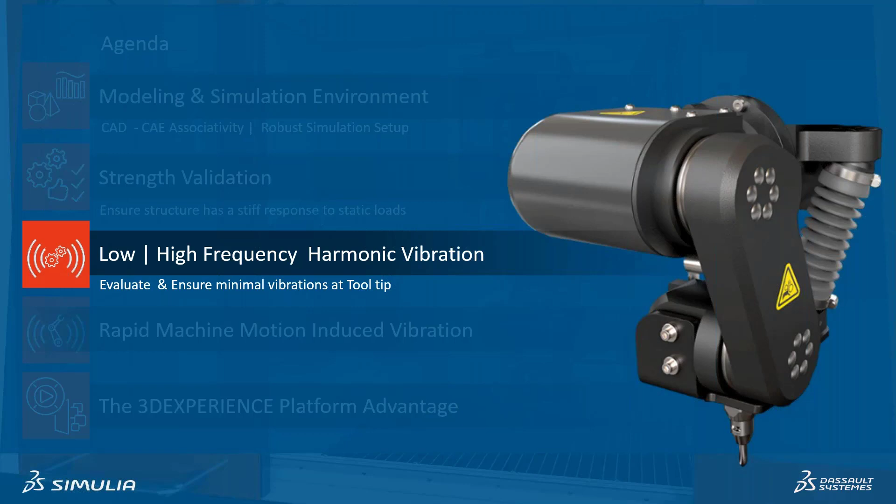So here I'm just going to focus on the rapid machine motion induced vibration, and for that we are going to set up a physics scenario where I'm going to use the fast machine motion test, where the tooltip in a circular motion will be depicted.

Rapid movement of a bridge in XZ direction. For this, we are going to duplicate the finite element, reuse the existing mesh, and add rigid bodies to it. So you can see this one is a rigid body and this one is the flexible body for me.

Rigid bodies, I mean, neglect the deformations, but the flexible body allows the deformation there. And we are going to see it with the help of this implicit dynamic technique, which works based on minimal energy dissipation, and it will help resolve the vibrational responses. And of course we apply translation in a periodic fashion: x direction cosine, z direction sine. So that's how we're going to evaluate this scenario.

So in order to set up that study for the rapid machine motion induced vibration, we are just going to duplicate the finite element representation. We want to keep it separate because we are converting some bodies as rigid bodies and some bodies as flexible bodies. That's why we are duplicating it, and we are going to assign a duplication prefix.

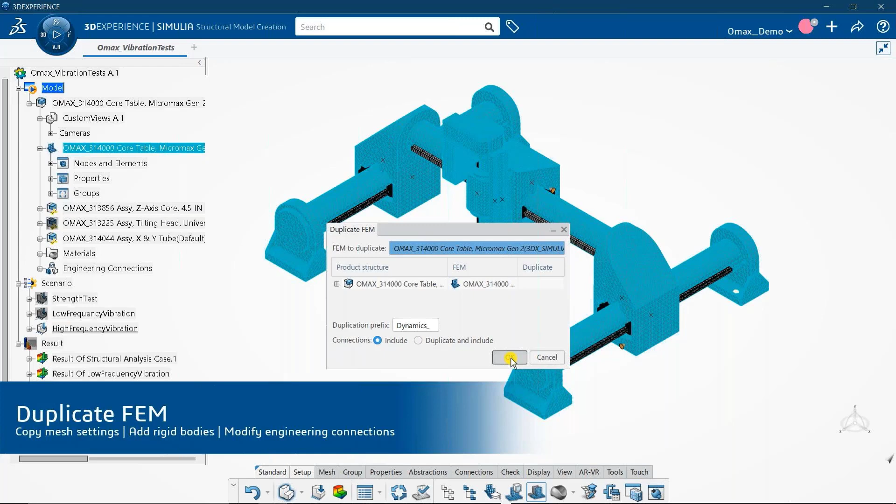So now we are going to create the new analysis case and we're going to assign that finite element model to it.

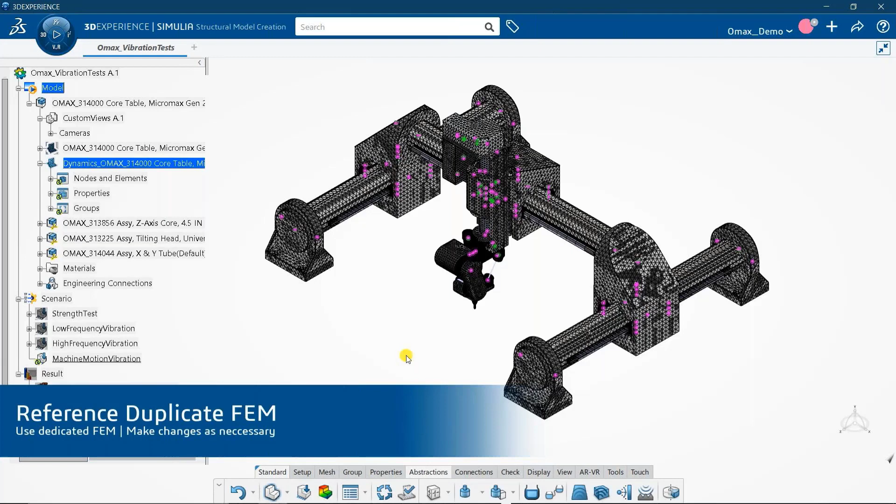So in here, we're going to set out the new name for this analysis case, like machine motion vibration. We're going to study the response from the rapid machine motion. We're also going to select out the second finite element model, which we have just attached a prefix to, and of course it will duplicate everything together and attach that finite element model to our new analysis case.

I do not want to consider the other assemblies as a rigid assembly, so here I just want to create and select out those bodies which I want to consider as rigid bodies. I'm assigning this middle tube and all those components except this one as rigid components. The rest will be the flexible parts to be considered. So you just have to be selective about which parts you want to consider as rigid parts, and that's all to it.

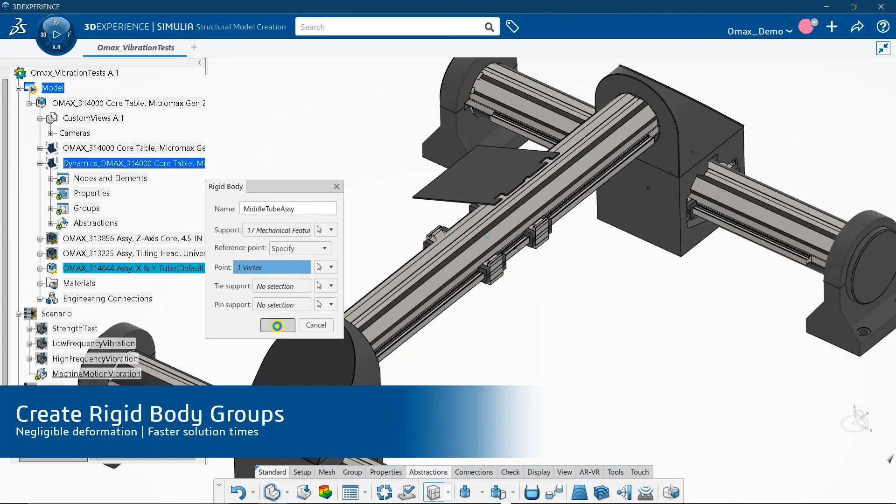Of course, we're going to fix one point for the rigid body here. Another thing is rigid bodies have negligible deformation, which helps us have faster solution time, because we are ignoring the effect of this rapid machine motion onto the rigid body, and the solver is intelligent enough to ignore that effect on those parts. But the area of concern here is the tool tip and the tool head, so that part will be selected as a flexible part, where detailed and niche calculations will be done, since that is a very sensitive area that affects everything along the way.

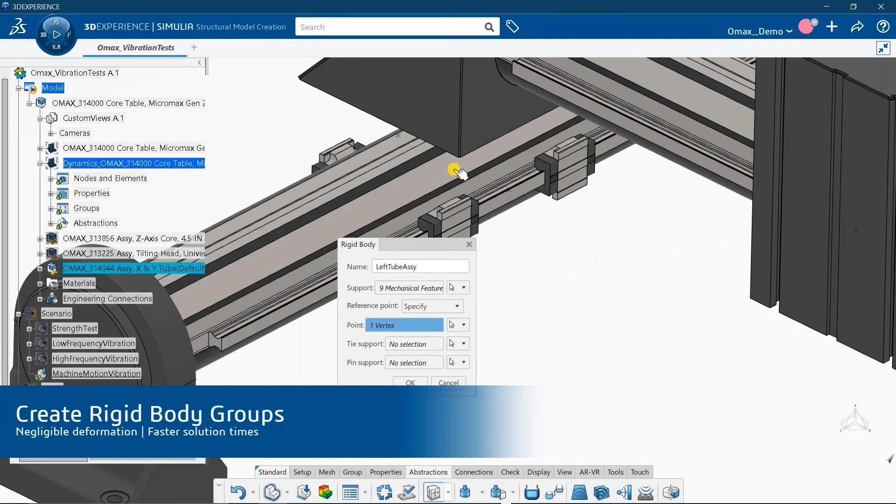So as this goes on, the rigid bodies will be selected all out here along the way. Finally we can select out, sorry, let me just go back - we select out the rigid bodies group here, and similarly we are going to select out the flexible bodies also. So this is going to be done one by one.

So we can make use of a connection manager in order to depict the connections here. Once we have defined the connector along the way, we are going to make use of this connection manager in order to assign the flexible motion to this component, in order to introduce that motion effect into the account.

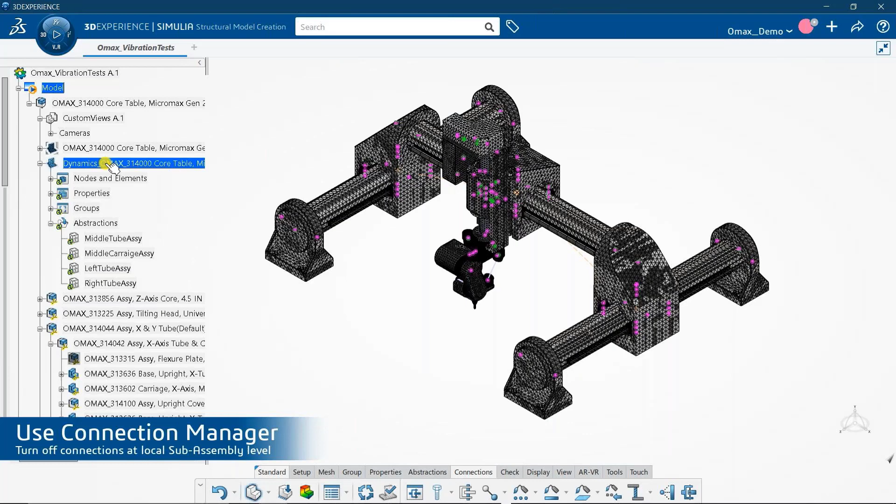So we can turn off the connection at the local subassembly level, so that we can make use of this connection manager. Likewise, these local translation connectors have been turned off. Now we can go ahead and use this connection manager to turn on the connections at the main assembly, so that at the subassembly level there should not be any movement, but at the main assembly level there should be movement. That's how we are going to depict the motion into it.

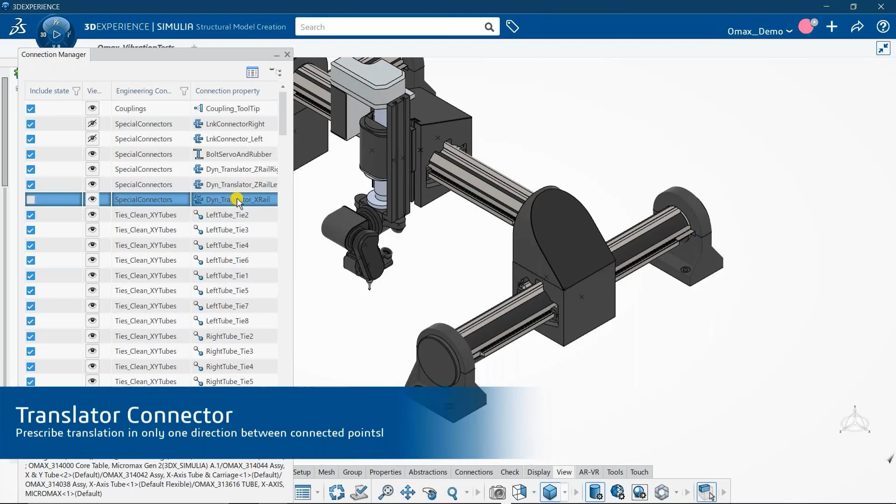For that, we are going to drive this motion with the help of the support vertices. We are going to assign the translation connector to those vertices, and take control of the motion based on this connector. It prescribes the translation in only one direction between the connected points - that's how the connection is useful here in order to depict the motion. So likewise, you can see the connection is being described right now with the help of this one.

And now in the next stage, we're going to remesh this assembly, or you can say update this assembly, and assign the implicit dynamic step. This is going to be another implicit dynamic step, and we're going to see the applications. We can select the applications.

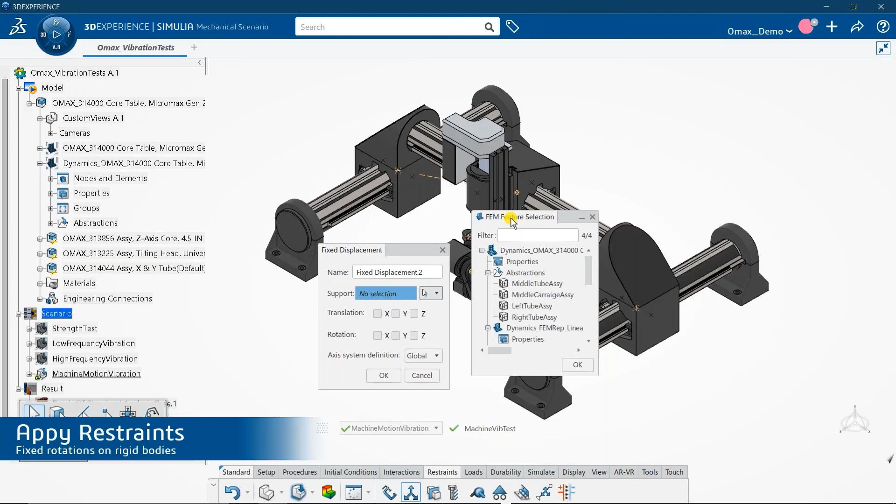Once this has been done, I'm going to set up the tabular amplitude, where a smooth motion will be there. Whenever we are trying to cut the portions together, we assign smooth motion to the tooltip, so there won't be any jerky motion. Since I want to use such a kind of motion, I'm going to assign this tabular amplitude there.

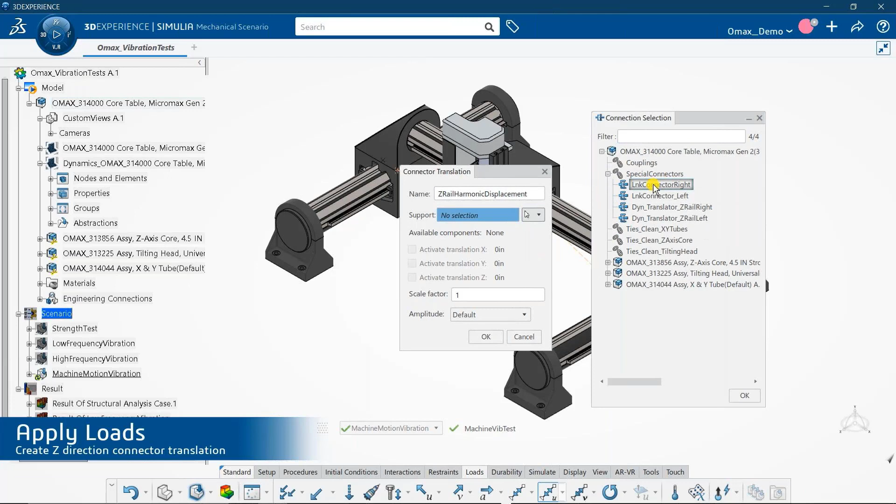Of course, we can apply the loads, creating the Z direction connector translation. I'm just going to select out the link connectors here, the dynamic translator altogether, and activate the translation in that direction. With the help of this dialog box and the previous dialog box for the amplitude combined together, the magnitude and the smoothness of the motion will be taken care of along the way.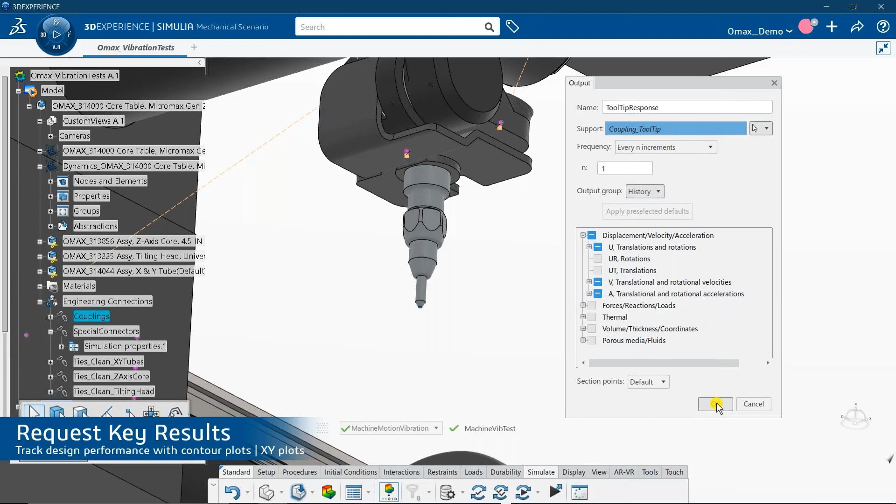So here we are also going to study the effect of gravity, and of course we are going to track out the output request for this one. Output request is nothing but which plot you want to extract from this one. I'm going to select translation and rotation as a history output for the tooltip. History output will give you the zoom-in result for a particular area.

Once everything is done, you can review this on the left hand side. Everything will be stored there, and we're just going to run the final study that we want to see. Here I'm making use of the cloud computing HPC environment, and it will consume almost 91 tokens, and 36 cores will be utilized, making it a very fast running study.

So that's how we can set up the study, now let's see the results here. We can analyze the assembly displacement during the motion, review the key responses at the tooltip, and evaluate whether the maximum stress is in the linear range during the motion. If it is in a non-linear range, there will be permanent deformation, and that's the area of concern for me.

Von Mises stress plot answers this question: are the dynamic stresses in the linear range or not? The displacement plot shows if there is any excessive deformation in the critical areas. And the coupling response shows the tooltip path, displacement, and acceleration at the tooltip.

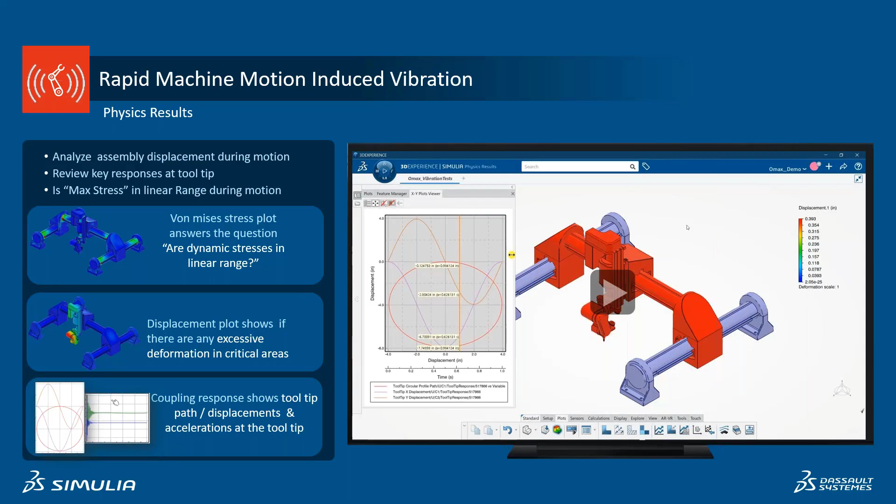So here, let's see how we can do it. Once we play the simulation, we have depicted the motion such that the tooltip will be moving in a similar fashion. That's the motion we have depicted with the help of tabular amplitude and the coupling motion we've assigned. And we can review the stresses and displacement likewise.

The tooltip, of course, displaces as we expected. We have anticipated how the assembly would behave when we define the tabular amplitude, and that's how it is performing here.

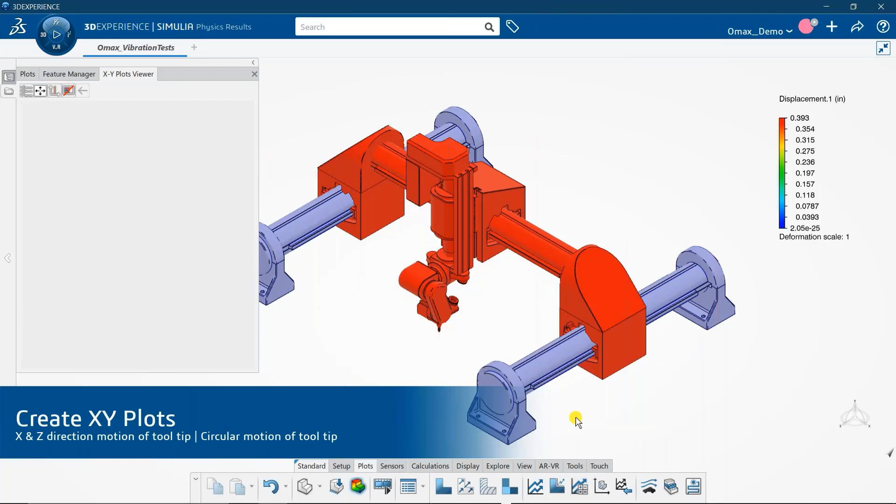Now I can go ahead and see the critical results with the help of plots and sensors. If I click on the XY plot, I can filter which area I want to select. First, I just want to see the displacement at the tooltip, so I select the variable there.

The support for the tooltip is nothing but your coupling, and this is how the tooltip is going to be in motion. We have assigned that particular motion to it, and it's giving you the x displacement in the same fashion. For y displacement, if you track down, you can compare the different displacement values, since cosine and sine functions were assigned beforehand, so here we are tracking the same amount of displacement.

Same for the circular tool path, we're going to assign and track the tooltip responses together. For the circular path, we want to see whether there is any deviation between the structural response and the machining state, so we verify the sine and cosine profile input created for the circular tooltip path.

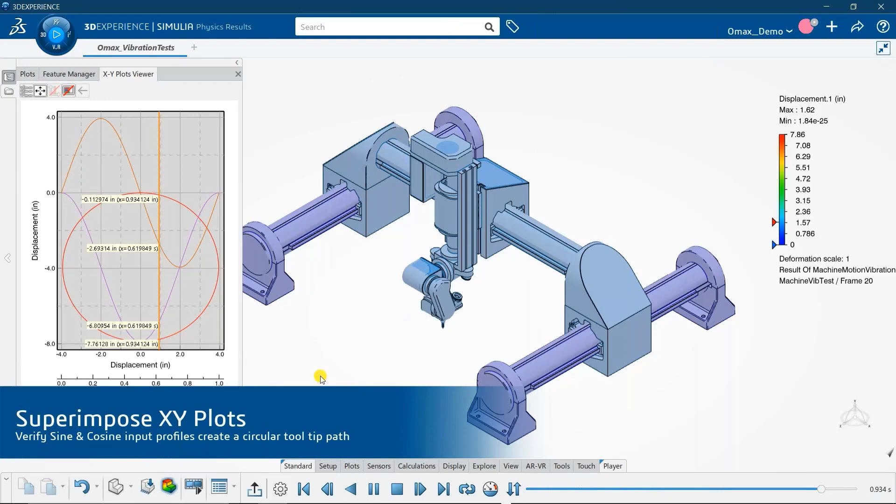We check if there is any deviation or maximum displacement change from this. That gives us an idea whether there is any additional displacement caused by rapid machine motion induced vibration that is affecting accuracy.

So that's how we plot everything together with the help of the superimpose XY plot, which verifies the sine and cosine profile created for a circular tooltip path.

So here we can jot down these results for different profile paths, and with the help of animation we can get an idea of how this thing is behaving. There are a few legends on the right hand side where we can review the maximum displacement differences between them.

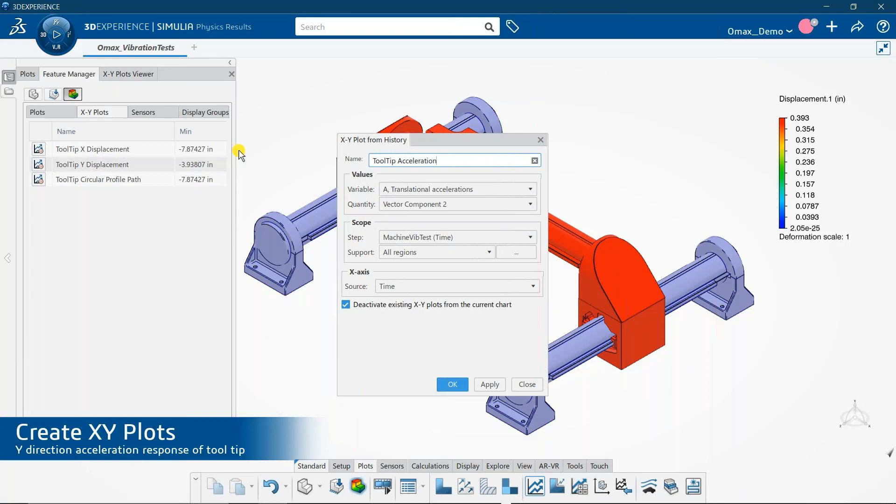Likewise, the same thing goes for history plots as well. History plots give us insight about the acceleration response, and this is very critical to track down because if there's any change in acceleration, there will be a jerk. You can see in the initial stage, let's say 0.1 or 0.2 seconds in, there will be a slight jerk here.

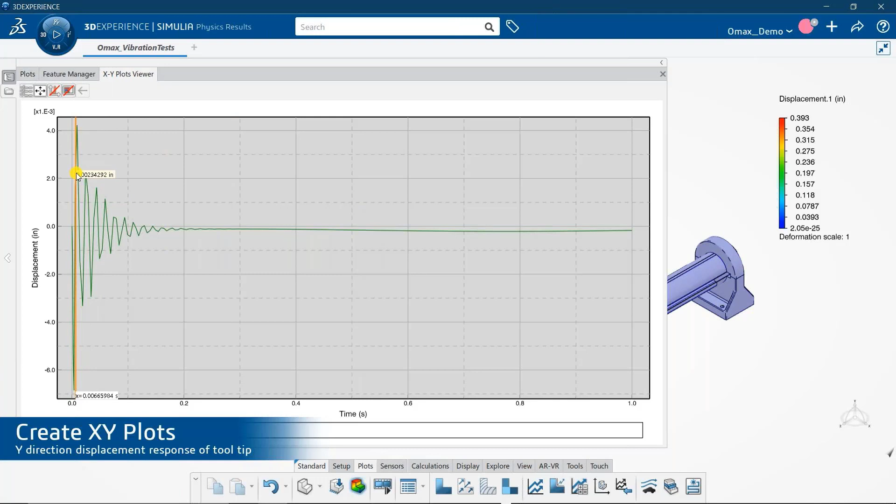The area of concern is how much the tooltip is getting displaced in inches. So in the initial stages, the tooltip might have some problem. While starting the machine, we have to start at the remote location and then bring the tooltip to the profile cutting location. That's how we can improve our accuracy.

That's a clear indication here. At the starting point, because there's a jerk, there will be some effect on the accuracy, from the starting point around 0.1 to 0.2 seconds. Then everything will be stable, and that's how the accuracy continues.

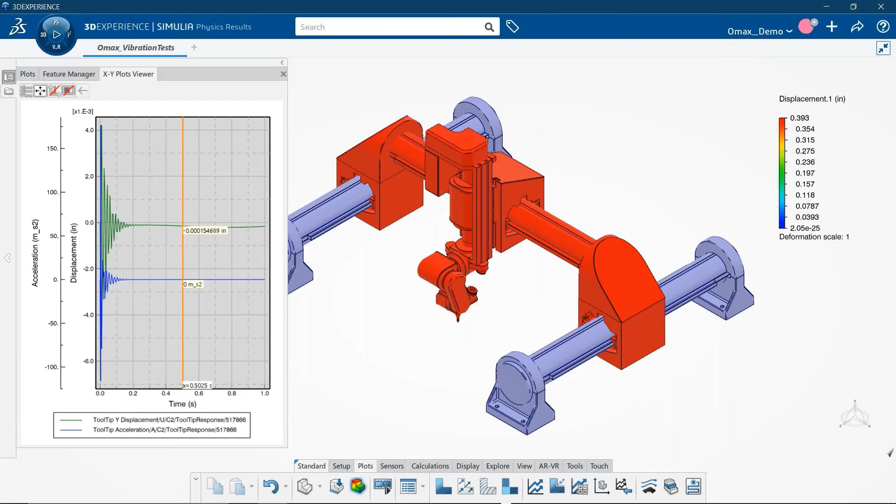Factors considered here include vibration noise and servo drives for manufacturing precision, and the effect of that is considered in the rapid machine motion induced vibration, and how we can improve those areas is also taken care of.

So, last thing here, the advantages of the platform. It can help you collaborate and communicate anytime, anywhere, on any device. It's a beauty, isn't it? Here we can co-design, co-simulate, and collaborate all together on the power of the 3DEXPERIENCE platform.

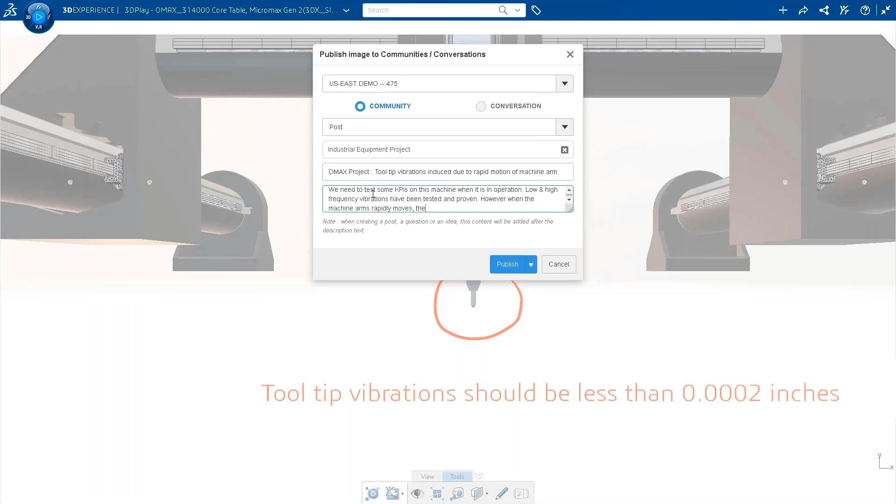With the help of this community, I can share my things on that community. This is like your personalized social media for your industry, and only your industrial personnel will be seeing this on that community.

To the left hand side you can see there's a 3DSwym, and the communities, whoever enters anything here will be recorded, just like we do on social media. I can enter and link any suggestions that I want to give here.

I can type in the comments, I can like the projects, I can create an idea. This 3D space here is the collaborative space where all the data is shared on the cloud storage.

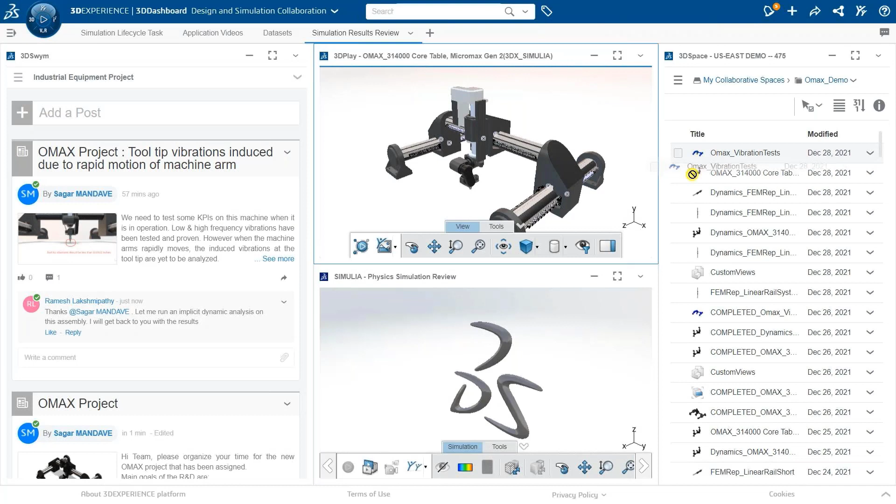If I want to drag and drop anything for the review, I can just go to the collaborative space, drag and drop it into the simulation review window. With the help of this physics simulation review, I can review the simulation without opening the simulation app.

This is just a player, you can say, for the simulation, and I can do it very nicely without the simulation app here. I can play the animation, track down the probe results, take the section views, and share this on the community for further reviews by other guys.

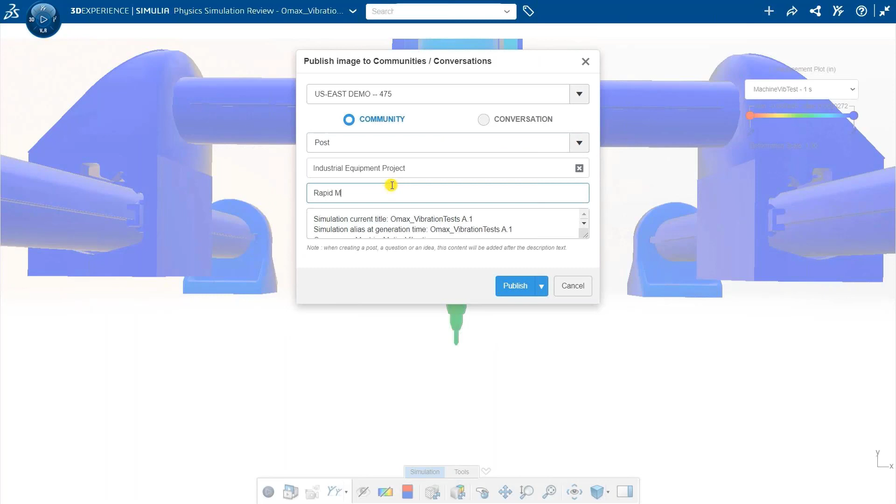Likewise, it will go on and on.

I can make out a few comments, chosen comments, like maximum displacement is below 0.0002 inches. The acceleration response looks good, and this design is acceptable for the further process. That's how conversations between community members can happen.

We can go further on. There are a few tools for project management as well, where we can track down the projects just like we used to do on Excel. This is very intuitive, where we can track down the responses from all the other guys who are collaborating on the same platform, and track the projects very neatly.

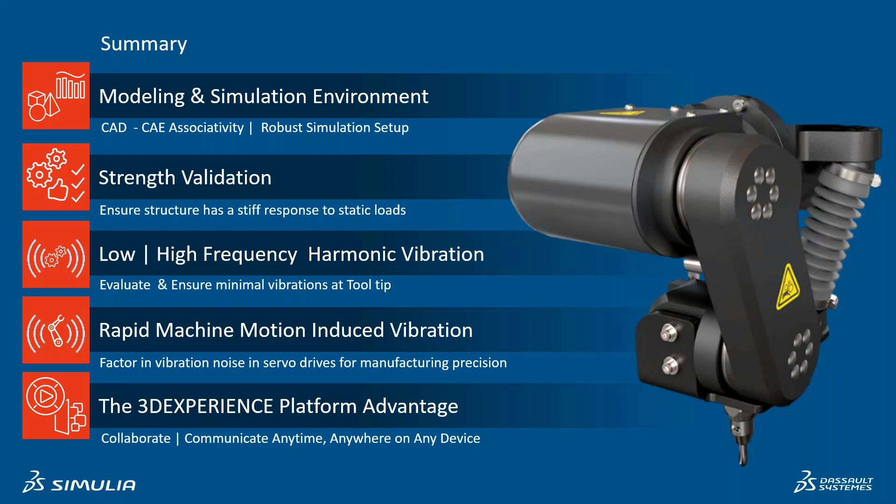The 3DEXPERIENCE platform gives an advantage where we can collaborate and communicate anywhere, anytime, on any device. That's how powerful the 3DEXPERIENCE platform is. In summary, this is the best tool for your simulation solutions.

The key takeaways: we can create a simulation-driven design, accelerate innovation, leverage cloud computing, improve the quality, and finally ensure the functional efficiency for your design.

3DEXPERIENCE Works is an integrated, design-centric, comprehensive, multi-physics, on-cloud scalable solution where you can collaborate with everyone within your organization. That's all to it.